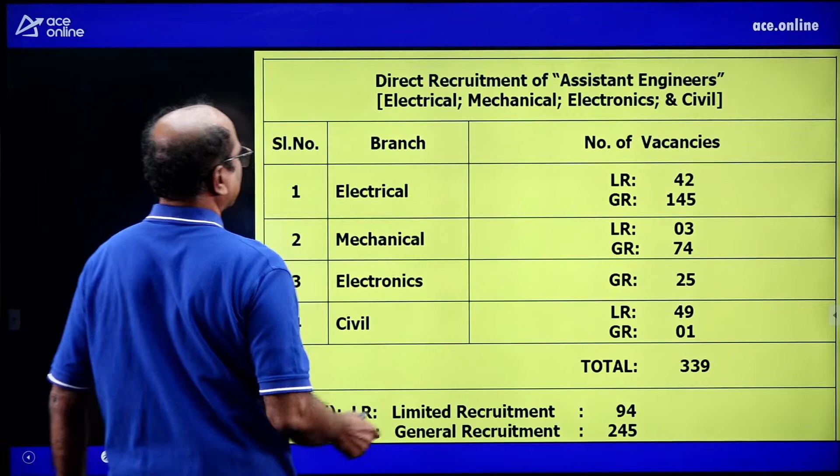Now these are the vacancies for civil engineers - 49 plus 1, 50 vacancies here. Mechanical engineers, 77 vacancies - direct and limited recruitment. And 50 vacancies in civil engineering.

A good amount of vacancies, enough to crack this examination. When we appeared those days, around 87-88, even for one post we appeared with success. So keep in mind, not the number of vacancies - you are there, there is a vacancy, that is the way you have to think and work for that. You are working for one vacancy, selection is important. Be positive towards selection and hard work.

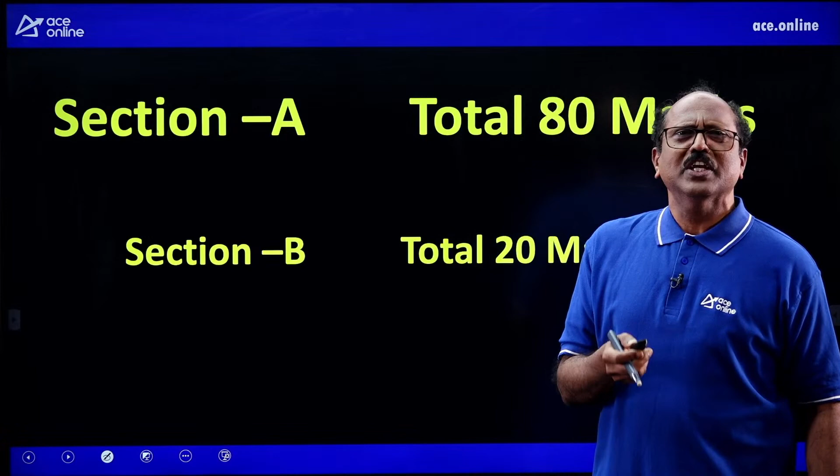Total marks 100. Part A technical, Part B non-technical. In technical, 80 questions, each question carries 1 mark. Section B, 20 marks - numerical ability, some English knowledge testing, and Telangana movement related questions, which we know very well. You can go through the 20 marks section.

At the moment we are focusing on the civil and mechanical engineering assistant engineer post in GENCO department, Telangana state government job - fluid mechanics and hydraulic machinery.

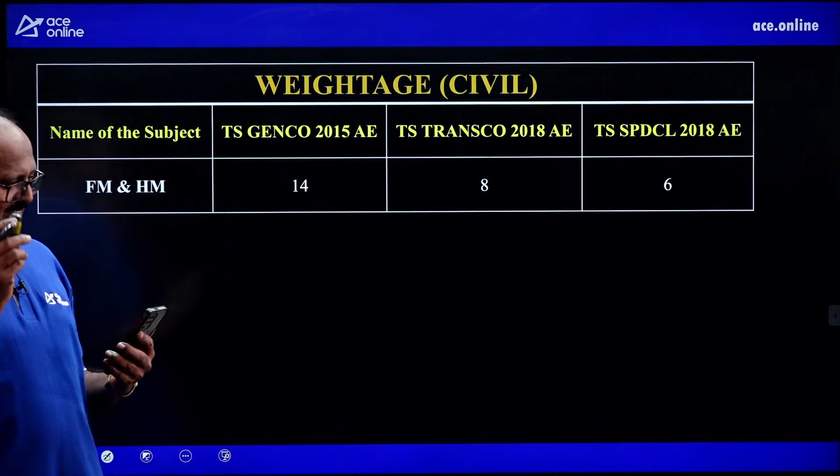Weightage of fluid mechanics and hydraulic machinery for civil engineering branch - if you see closely, there are 14 questions. For mechanical engineers, number of questions is 11. 14 questions for FM and HM, civil engineering given more weightage.

Similarly in 2018, if you observe Transco and SPDCL, there were fewer vacancies those days, but I am familiar with that - those times had 8 and 6 questions.

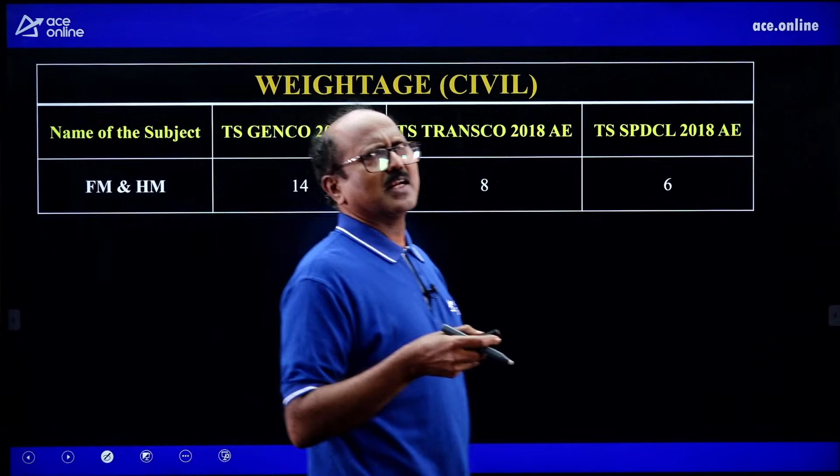Now for mechanical people, FM and HM weightage is 11 questions - 7 questions fluid mechanics, 2 questions water turbines, and 2 questions centrifugal pumps. 7 plus 2 plus 2, total 11 questions. So approximately 12% weightage given, more weightage compared to core subjects. Fluid mechanics and hydraulic machinery always get a reasonable, moderate weightage for any competitive exam.

Even if you consider GATE, IES, any state government exam, particularly Andhra Pradesh has 75 questions on FM, HM - 50% in paper 2, like that.

Now focus on fluid mechanics at a glance, and machinery. So before starting fluid mechanics and machinery, we need to give respect to the modern temples.

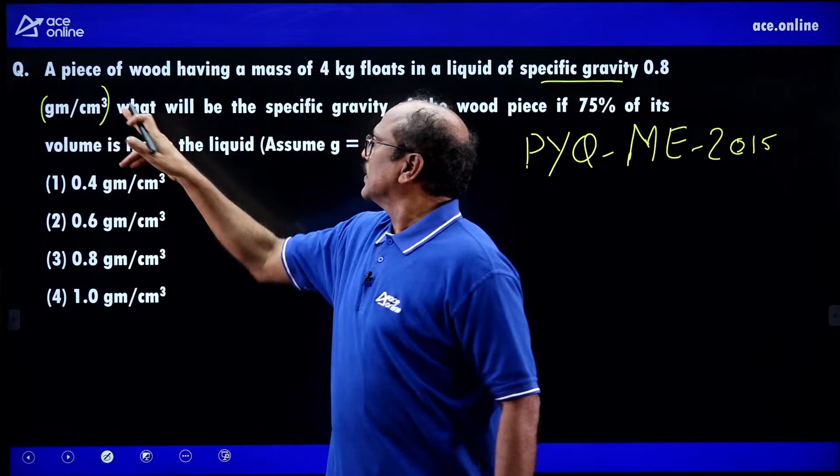A piece of wood having mass 4 kg floats in liquid of specific gravity 0.8. Specific gravity is given as 0.8, and units also given, but need not give units here. That is slightly an error. Specific gravity has no units. Luckily, the numerical value of specific gravity has no units, but the same value applies to specific mass, nothing but mass density in CGS units, gram per centimeter cube. If you take 0.8 without units, specific gravity is correct. If you take 0.8 with gram per centimeter cube, that is called specific mass, nothing but mass density. Anyhow, what will be the specific gravity of the wood if 75% of the volume is inside the liquid?

This question pertains to buoyancy, given in our booklets, ACE material, 3rd unit. Specific gravity of liquid is 0.8. Wetted volume - if you follow my class notes, you should write like this - means wetted volume is equal to 0.75 of total volume, V is total volume.

Then what is the specific gravity of the wood, that is the solid piece? By principle of buoyancy - we know this, no need to derive again - specific gravity of the liquid into wetted volume is equal to specific gravity of the wood body into whole volume. Specific gravity of the liquid, that may not be water, may be oil, because it's less than 1, 0.8, into wetted volume in the liquid, is equal to unknown value of specific gravity of the solid piece, wood, into total volume.

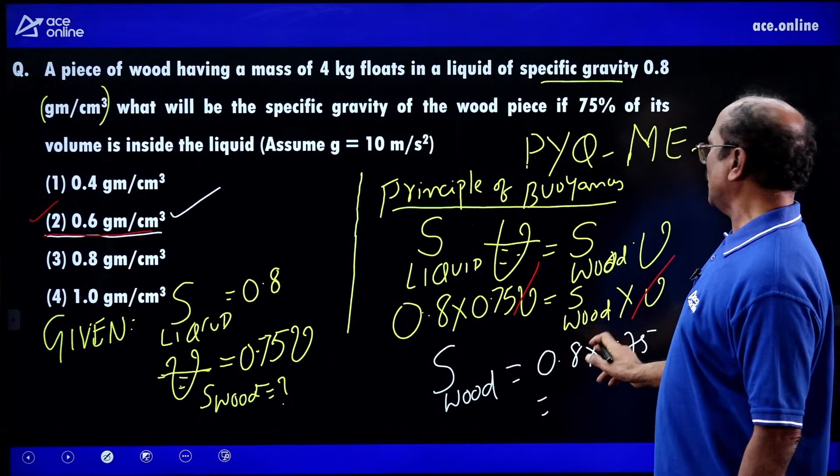If you see closely, without calculator, total volume cancels. Therefore, S wood, specific gravity of the wood, is equal to 0.8 into 0.75. For calculation purposes, 0.8 into 0.8 gives 0.64, but 0.75 is little bit less than that, so that sense apply in the examination. Answer is option B. Product of 0.8 into 0.75 is 0.6 something, so confirmed answer is option 2.

Buoyancy, 3 questions appeared in this paper; question sets are made supposing 1 question per chapter. Anyhow, 0.6 something is the specific gravity. Units given as gram per centimeter cube, that is specific mass density in CGS units. Without units or with units, same numerical value is important - truly speaking specific gravity 0.8, specific mass 0.8 gram per centimeter cube, same sense, 0.6 gram per centimeter cube. Units are balanced on both sides, volume cancelled, whatever units you write it is fine.

Next, second question, also from buoyancy. A rectangular plate, surface width 2 meters, deep 4 meters, lies vertically in water. What will be the pressure and center of pressure when upper edge is 2 meters below the free surface? Excellent question, worth question for both mechanical and civil. Such questions you can expect - even this question is at par with GATE and ESE exams.

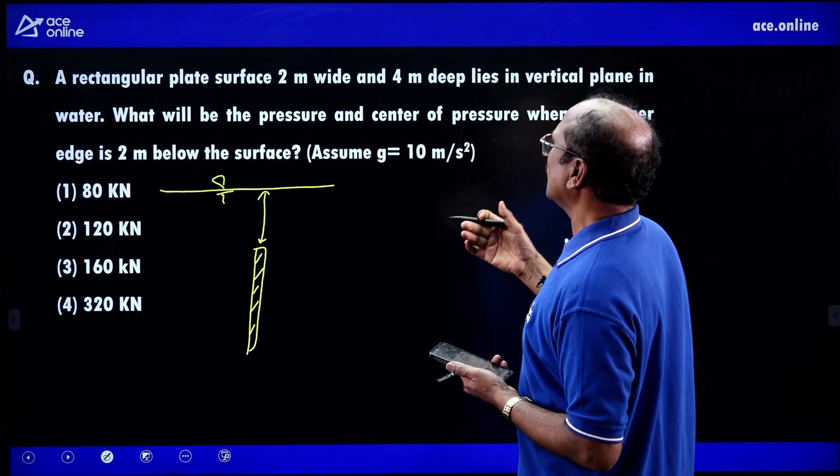A neat systematic question has appeared here. It is a free surface of water - the inverted triangle means free surface of water. A rectangle plate, this is the rectangle plate, immersed in water, top edge is 2 meters below free surface, so Y equals 2 meters. Then dimensions of the rectangle plate - if you see side view, this is the side view of the plate, plane plate - 2 meters width, height is 4 meters.

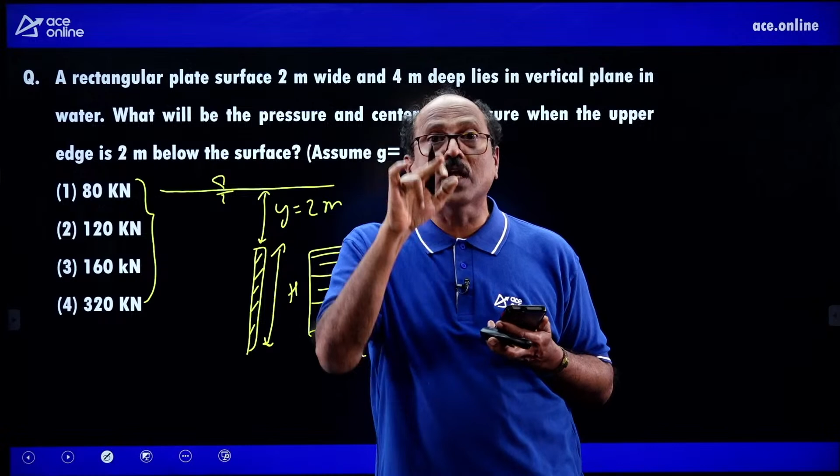Then it is expecting what will be the total pressure and center of pressure - only asking force, not center of pressure. Question supposed to be 2 bits: one is center of pressure in meters, other is total pressure. Total pressure is also called hydrostatic force - pressure units are different, total pressure units are different. Total pressure is called hydrostatic force, pressure force, with units Newton, kilonewton, giganewton, meganewton. Total pressure is force only, simple pressure is Newton per meter square. Never get confused with that.

Here supposed to be, by seeing the options, we have decided. So force on the rectangular plane surface of width 2 meters, height 4 meters is rho into G into H bar into area wetted. Is equal to rho into G into Y plus H by 2. This is the distance from free surface to centroid, G is centroid, below that C is center of pressure, where force is acting.

Force depends upon this H bar, which is the distance from free surface to Cg of the wetted surface. H star is the center of pressure - it is there but not asked. It is equal to 1000 kg per meter cube, G 10, this is 2 meters, depth is 4 meters by 2, area B into H, 2 into 4.

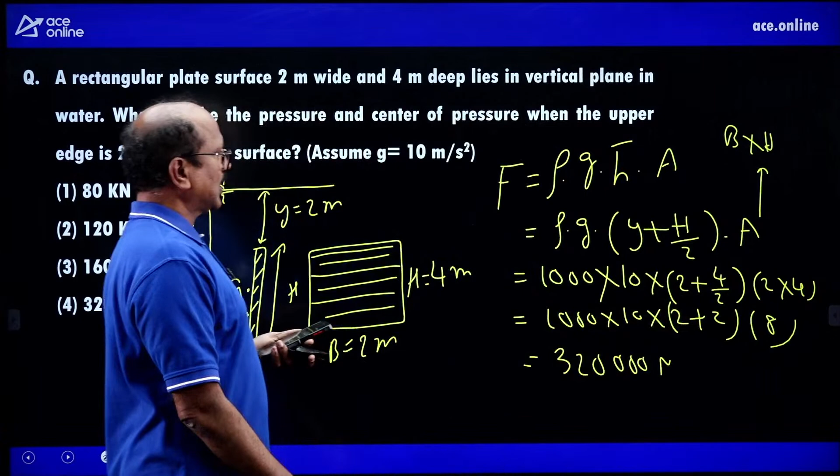1000 kg per meter cube, g 10 meter per second square into 2 plus 2 is 4, then 8. So 32, giving 320,000 Newton. Because 2 plus 2 is 4, 4 into 8 is 32. So the answer is 320 kilonewton total pressure.

Answer D. This type of question you can expect without a calculator. Focus on this type of question. In future, in place of rectangle it can be circular, it can be triangular. We have this in the class notes and in the ACE material also. Questions will surely be at par with our class notes and ACE material. You need practice, and how to practice we will discuss at the end of the course. No confusion necessary, no hurry-burry. Answer is D.

We are spending a little bit of time, but while practicing it is a matter of hardly 1.5 to 2 minutes maximum. This question is also from buoyancy, unit number 3.

What will be the volume of water displaced due to buoyancy of the wooden block? Width 2, depth 1 meter, density of wooden block given, and length is given. Width or breadth 2 meters, depth is 1 meter, length is 4 meters. Density of the wood, or specific gravity of the wood, is 0.7, with no units.

Density of the wood is nothing but specific gravity of wood into 1000, which gives 700. Just to make the subject clear, I have written it directly here. What will be the volume of water displaced? Yes, depth is 1 meter given. He has given the depth also.

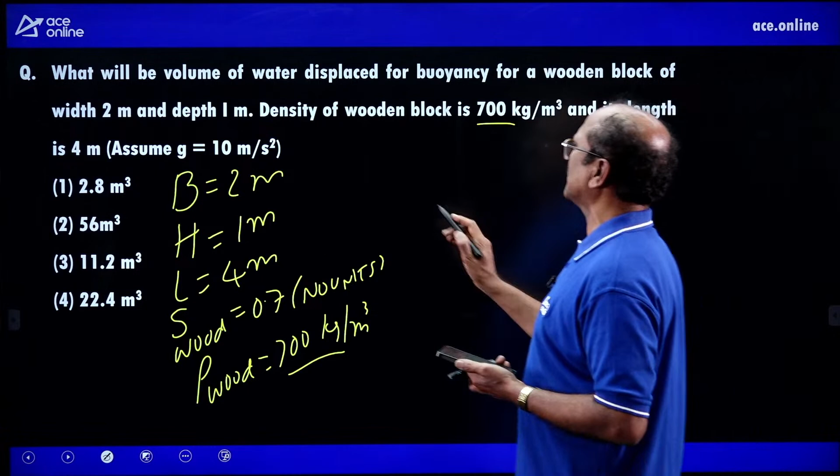So this depth given is small h, but total height is different. Volume of water displaced for buoyancy of the wooden block - the physical dimensions are like this: this is width B, this is the height, length is not visible, perpendicular to plane of paper. Immerse it in water - what is the wetted volume, the water displaced? This is unknown, small h, while capital H is given. So we know the subject knowledge very clearly.

A simple relation: S water into wetted volume (how much is immersed in water) is equal to S wood into total volume. S water is 1, since water is the material given, into unknown wetted volume, because we don't know small h. If you knew small h, it would be B into small h into capital L, where L is length of the body. This equals S wood, 0.7, into total volume which is L into B into H. This other volume is L into B into small h. Very clear - no need to find H.

You can find H also, the depth of immersion. Total height of the body given is 1 meter, depth is unknown. Anyhow, depth means 0.7 meter. Volume is L into B into H: L is 4 meters, B is 2 meters, H is 1 meter, giving 0.7 into 8 meter cube. So 1 into wetted volume equals 0.7 into 8 meter cube.

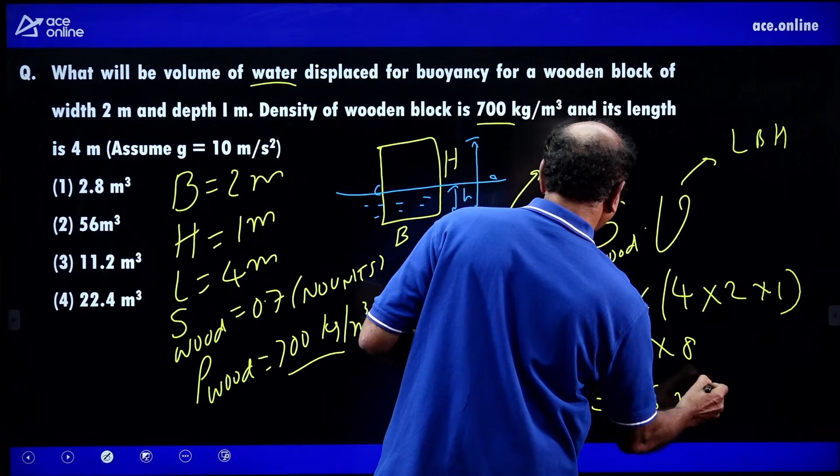0.7 into total volume: 4 into 2 is 8, 8 into 0.7 gives 5.6 meter cube. Maybe there's a typing error here - assume that, then the rest is correct, not 56 but 5.6, typing error. 7 into 8 is 56, with the decimal point, so the answer is 5.6. Everything in order. See, three questions observed from buoyancy alone.

Diameter of the pipe at two sections, section 1 and section 2, is 2 centimeters and 4 centimeters respectively. The velocity through the pipe at section 1 is 5 meters per second. What is the velocity at section 2?

So there are different diameters - this is the pipeline, 2 centimeters diameter, like this. This is the pipe, not branched. This is D1, this is D2, this is section 1, this is section 2, at section 1 we have V1, at section 2 V2. We know very well that for pipes in series, the discharge is same through the entire pipe, so A1 V1 equals A2 V2.

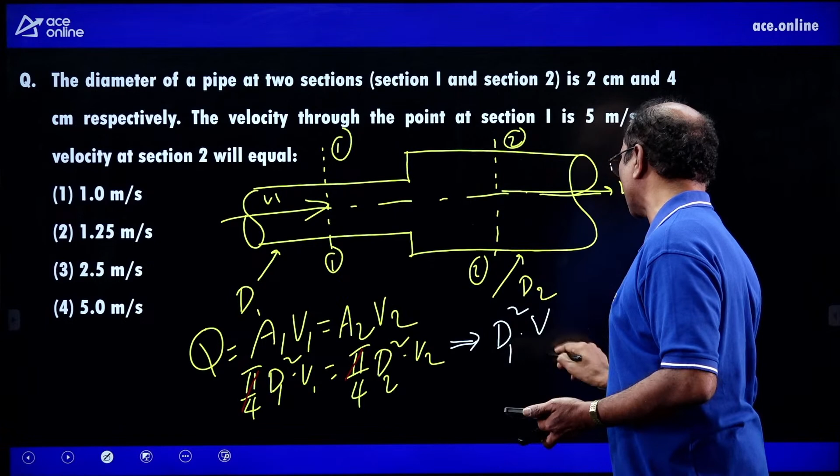Pi by 4 cancels out: Pi by 4 D1 square V1 equals Pi by 4 D2 square V2. After simplification, D1 square (in centimeter square) into V1 equals D2 square into V2. Keep the units consistent, centimeters properly or meters properly. 2 centimeter whole square into 5 meter per second - this is meter per second, this is centimeter square. See that the other end also has the same units: 4 centimeter whole square, which is centimeter square, into unknown velocity in meters per second.

4 by 16 is 1 by 4, which is 0.25, and 0.25 into 5 gives 1.25. This is simplification, not just calculation. V2 equals 2 by 4 square, that is 1 by 2 square, 1 by 4, 0.25, 0.25 into 5, 1 by 4 into 5, gives 1.25.

So 1.25, answer 2. So simple. What is the concept? This concept is continuity equation.

One basic question, because the examination is set for people from age 21 to 44 years, covering young people and seniors, though not senior citizens exactly, more like young seniors. So the paper setting will be like this only. Don't expect too much velocity triangles or something beyond your scope. The paper will be within the hands of the student community. Continuity equation, Bernoulli's equation, simple concepts.

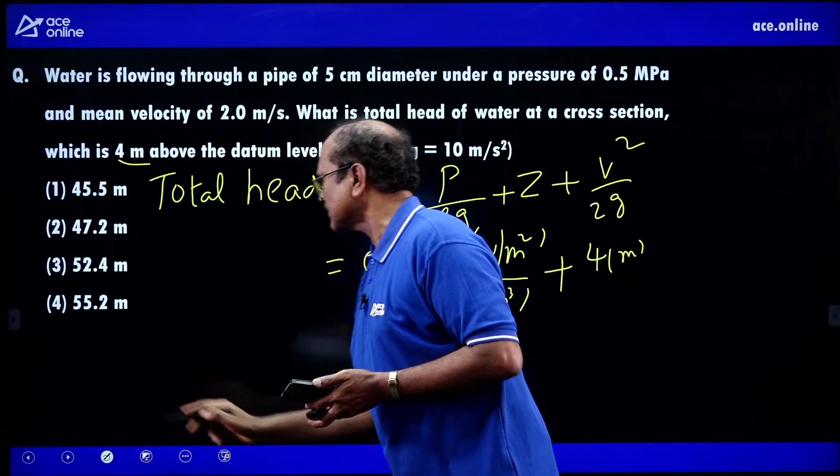After cancellation of these units, Newton cancels. Units are the backbone of fluid mechanics. If you are familiar with the units, 50% of the subject is in our hands only. This cancels, 1 by meter, 1 by meters. Keep in mind the units homogeneity. For civil engineers, we have dimension analysis also.

V is given as 2 meter per second, divided by 2 into G which is 10. This is meter per second whole square, this is meter per second square, final unit is meters. So the 5 centimeters diameter is extra data, no need to use it. So after cancellation of this...

0.5 into 4 zeros, so 2 zeros cancel, giving 100. 0.5 into 100, say 50, 50 meters. Plus 4 meters, plus 2 square by 2, that is 4 by 2 equals 2, 2 by 10 equals 0.2. Say 54.2 meters. So is the near value 55 or 54.2 there?

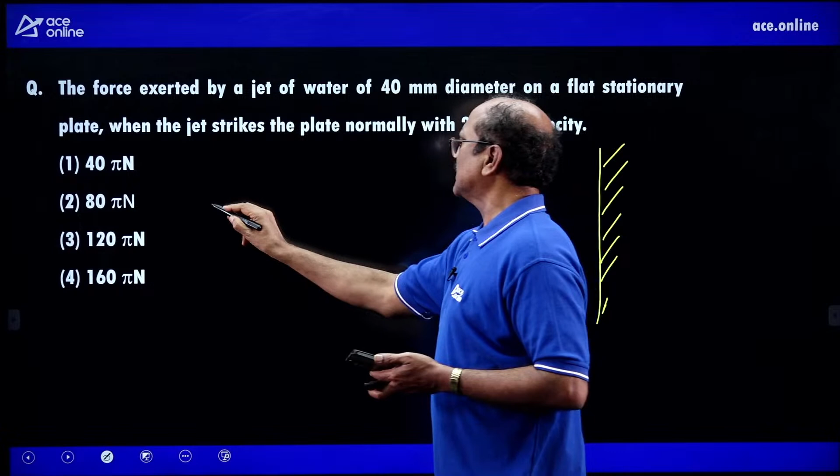Nozzle produces a high velocity jet, hitting the plate. This jet velocity V is equal to 20 meters per second. Diameter of the jet is 0.04 meters, that is 40 by 1000, 4 by 100, 0.04 meters.

What is the force experienced? What is the normal reaction? What is the force experienced by the water on the plate? Fixed plate subjected to a water jet, we know very well, mass into acceleration, that is equal to mass into change in velocity, rate of change of velocity. That m dot is written because mass by time into dv. M dot is rho Q.

V2 minus V1, in the x direction, because we want the x component. By simplifying this, rho into A into V. Final velocity in y direction is considered, x direction final velocity is 0, minus V, minus. The minus indicates the reaction offered by the plate, plus positive indicates the jet creating force on the plate. Negative positive, the difference is only this.

Jet on the plate is positive. Plate on the jet is negative. Action reaction, Newton's third law. Our need is magnitude, our need is magnitude. Rho A V square. Negative sign means force offered by the plate on the water, positive means force offered by the water on the plate. Force exerted by a jet of water on the plate, positive, no problem.

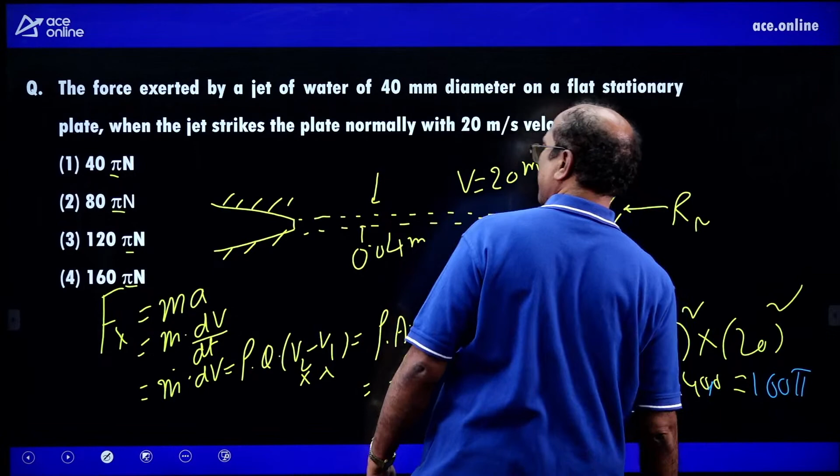By simplification, with close observation, this 4 cancels. Here 3 zeros, here 3 zeros cancel, here 1 zero cancels. So leftover is pi into 4 into 4. 4 into 40, 160, right? 160 pi, correct. Simplification also correct. 160 pi Newton, D answer. D answer correct, without calculator, just mouth calculations.

Very good, people are so responsive, people are so quick responding. People seem to be practiced already. Good, good, good, keep it up, keep it up. Super.

This is the question pertaining to compressible flow, excellent simple derivation, basic continuity equation for the compressible flow. I am solving all the questions available in our hands.

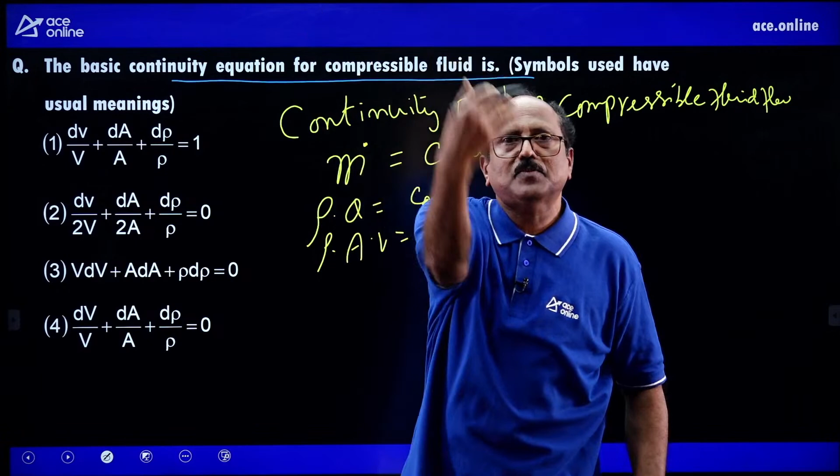Continuity equation of compressible fluid flow: M dot, mass flow rate in kg per second, is equal to constant. M dot is equal to rho into Q, is equal to constant. Rho into A into V is equal to constant. In compressible flow, rho also is variable. In incompressible flow, rho is constant. A into V is equal to constant by rho, again one more constant. 3 are variables here: flow through nozzle, flow through duct, flow through convergent, flow through divergent, subjected to density change, is called compressible flow. 3 variables.

Differentiate both sides. Differentiation of the constant is 0. Differentiate d(rho into A into V). We know differentiation: rho into dA into V plus rho into A into dV is equal to 0. Divide both sides by rho into A into V.

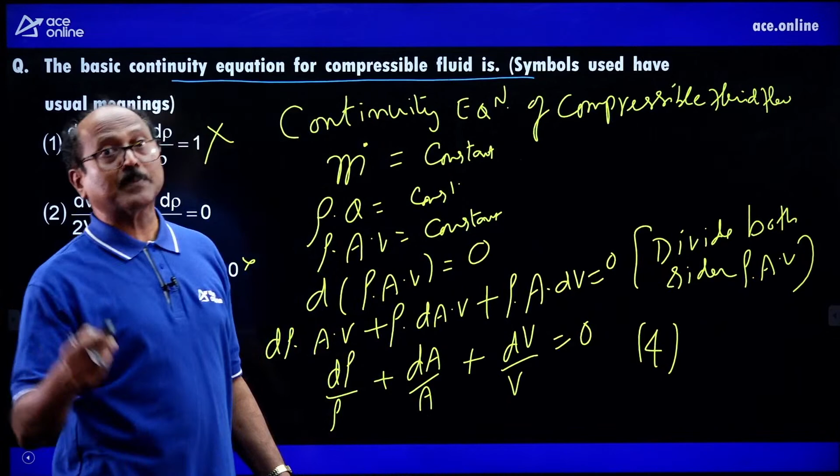We have compressible flow also here. Basic question, yes. Completed the previous questions on fluid mechanics, mechanical. Let us see some practice questions before attempting.

PYQs of the AE GENCO hydraulic machines. A turbine is a device which converts hydraulic energy into mechanical energy. Here suppose hydraulic machine can be a turbine, can be a pump. Option 1 is turbine, correct. Option 2 is reverse, mechanical into hydraulic.

This is for the water turbine, this is for water turbine, this is for water pump or liquid pump. Kinetic energy to mechanical energy also correct. It can be a windmill, it can be a windmill turbine. So turbine means, in our syllabus, water turbine. Argument point of this is also correct. Turbine can be wind turbine, but windmill we say. So appropriately, in this option, C also can be an answer. Strictly arguing, C also has equal weightage given.

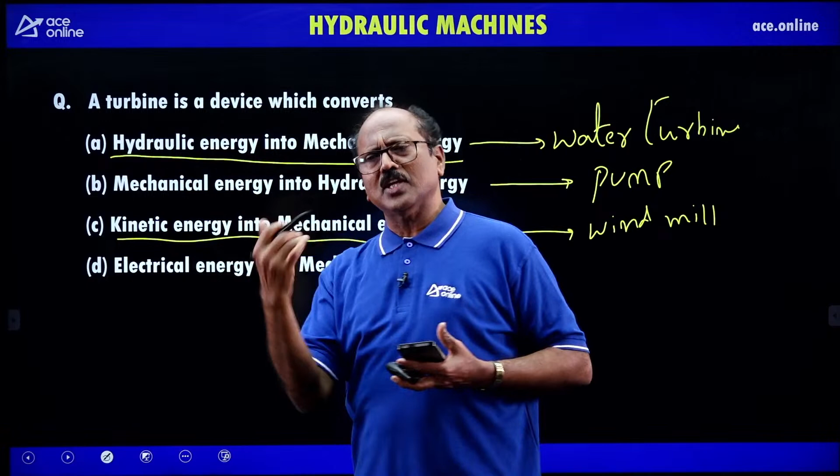Any energy - but hydraulic energy means anything, combination of pressure, combination of potential, combination of kinetic. Only why kinetic only? Why not potential energy? There it fails, so only for wind turbine it's correct. This is general, nothing is mentioned. Here, in place of turbine, if it is wind turbine, then C is correct. So turbine means total energy, combination of pressure, kinetic and potential. So correctly A, no doubt about it. C is wrong at present.

Then electrical energy into mechanical energy, so it can be a motor, it can be an electric motor. Converting electrical energy into mechanical energy - electrical motor, ceiling fan, table fan, exhaust fan, our water pump fan - water pump motor, not fan, water pump motor, electric motor simply. So like that, all available options, try to explore. So with n variables, you can create n factorial variables, n factorial questions also. There are 4 options, each option indicates some reasonable answers. Our question is turbine, converting hydraulic energy into mechanical energy, correct, A correct, not C. C is a limited answer.

For a head up to 25 meters, up to 30 meters - this question is given in other branches, electrical branch given. The syllabus is common to many branches, so it comes under power plant engineering for electrical people. Less than 30 meters is low head. Head less than 30 meters.

Low head turbine, Kaplan propeller turbine. This is high head, above 250 meters. This is medium head, above 30 meters and less than 250 meters.

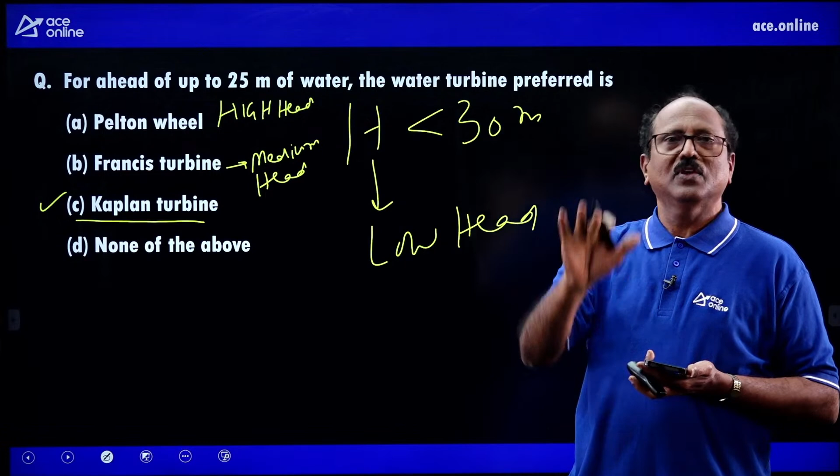Argument sir, high head above 250, above 300, above 280, anything valid, depend upon the data given, you take appropriately. So 200 meters given can be Francis. Nothing is there, Francis can be Pelton also. But Kaplan and propeller turbines less than 30 meters, less than 20 meters, less than 40 meters also. If you take Singur Dam, there you can have Kaplan turbine as per head, but Francis turbine used. So there are 22 numbers, 22 figures, 25 can be, 30 also, varies depend upon choice given, you choose correct answer. At present, reasonable answer is C, can be propeller turbine.

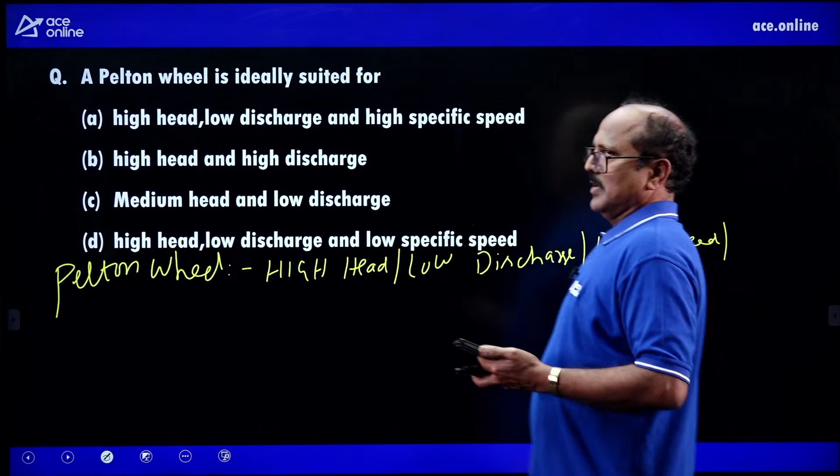Just information only, those who are prepared well, they know it very well. Low specific speed, tangential flow, and impulse type.

Like that, Francis turbine: medium head, medium discharge, medium specific speed, radial inward flow, and reaction type.

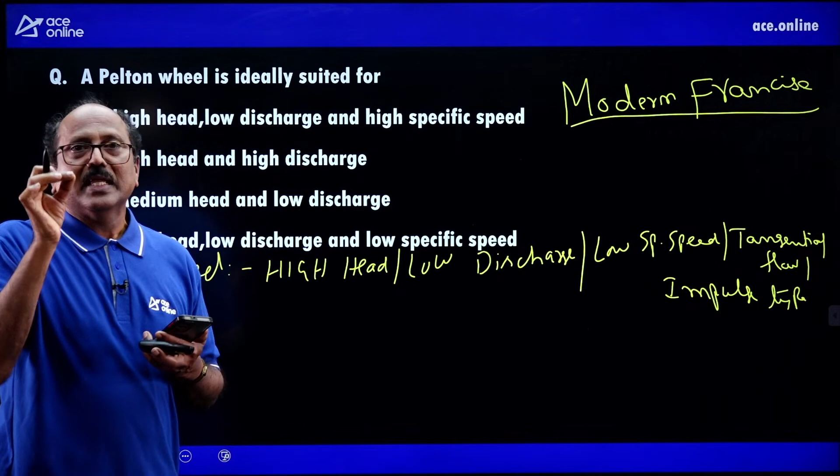There is one more word nowadays, a chance possibility. Keep in mind, a new terminology not much familiar to people: the modern Francis turbine. Keep in mind, important, it is similar to the traditional Francis turbine. Only difference is that its flow is mixed flow.

Mixed flow: radial plus axial. Enter radial, leaving axially - mixed flow is the modern Francis turbine. Remaining characteristics are same: medium head, medium discharge, reaction type, medium specific speed. But flow is not radial, mixing radial and axial.

That is important. Similarly, Kaplan turbines, propeller turbines: low head, high discharge, high specific speed, axial flow. Axial flow means flow parallel to shaft axis. If you take this turbine, mostly Pelton wheel is mounted horizontally, other turbines mounted vertically.

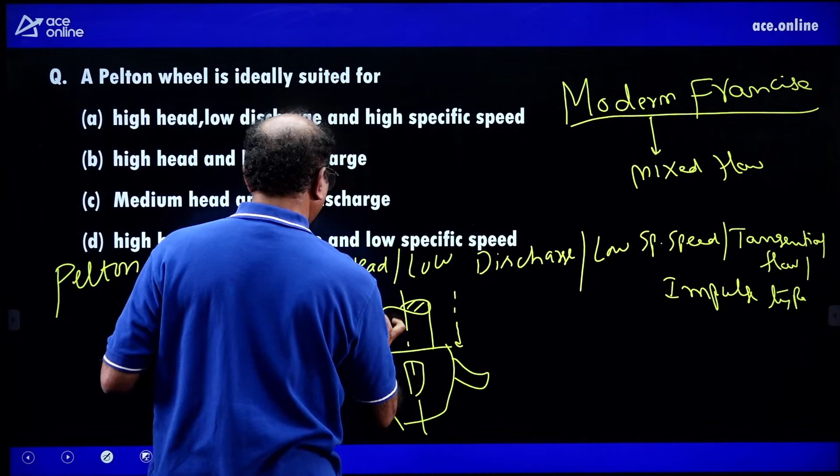These are the blades, these are the vanes. The flow is entering parallel to shaft axis. These are called axial flow turbines.

Now if you take our domestic affair, exhaust fan or table fan, air taken from the back side, thrown into the front side - this is axial flow. Flow of the fluid parallel to the axis of the shaft is called axial flow.

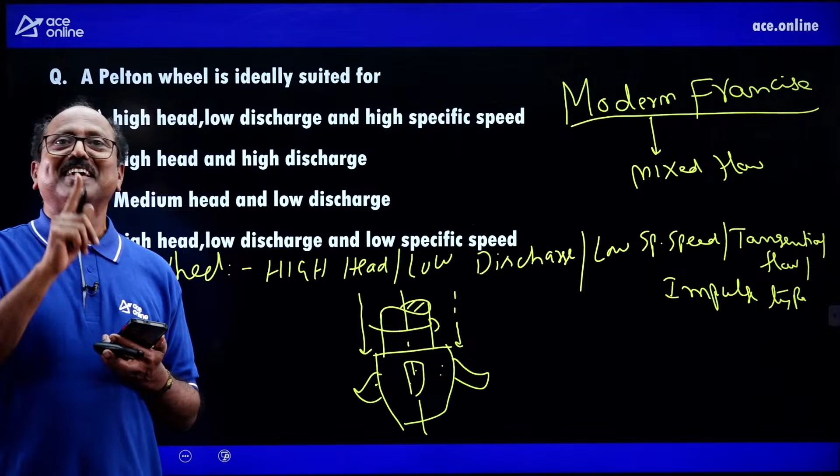Kaplan type. Then what is the difference between Kaplan and propeller? Important bit, this also a possibility this time. Kaplan turbine has adjustable blades, adjustable vanes... Kaplan turbine consists of adjustable blades, whereas propeller turbine consists of fixed blades, not adjustable.

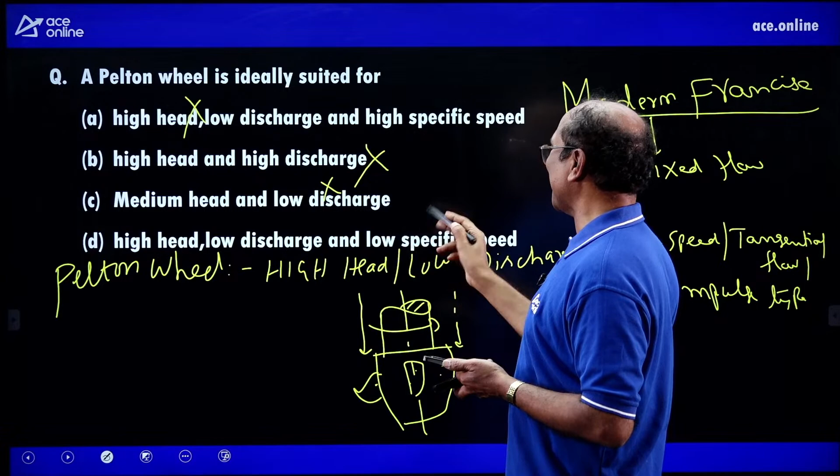So high head to high discharge never possible. High head to low discharge, okay, but wrong na, this not matching. Medium head to low discharge not matching. High head to low discharge, low specific speed, matching, see right? So very clearly given, high head, low discharge, yes matching, D matching. High head, low discharge, low specific speed, perfectly matching. Answer 4, answer D, a good question.

Apart from the question, some information given: difference between Kaplan turbine and propeller turbine. Kaplan turbine fixed blades - wrong, adjustable blades. Propeller turbine - fixed blades. That one. And modern Francis turbine - mixed inward flow, radial plus axial. Francis turbine is inward radial, Francis turbine is nothing but medium head.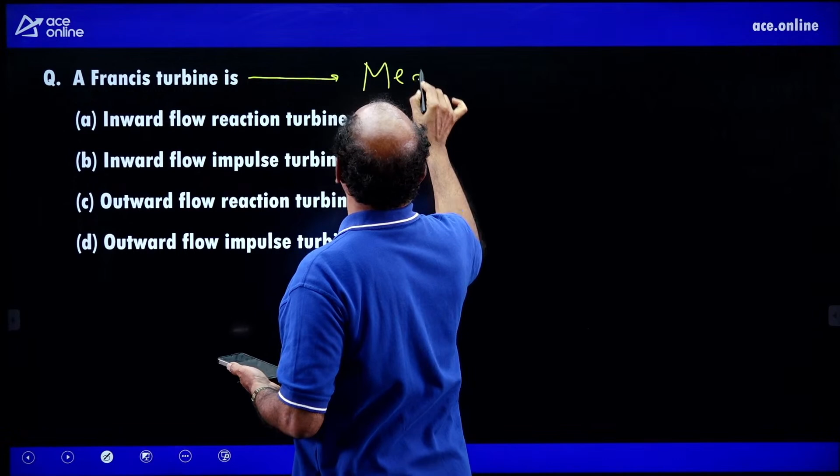Medium flow rate, medium specific speed, reaction type. We know reaction - reaction type means input energy is mostly pressure energy, partly kinetic energy.

Impulse means 100% kinetic energy, no pressure energy. That is Pelton wheel, working in open atmosphere, no draft tube is required. Other turbines - Francis, Kaplan, propeller, modern Francis turbine - need draft tube. What is draft tube? Converting available kinetic energy into useful head.

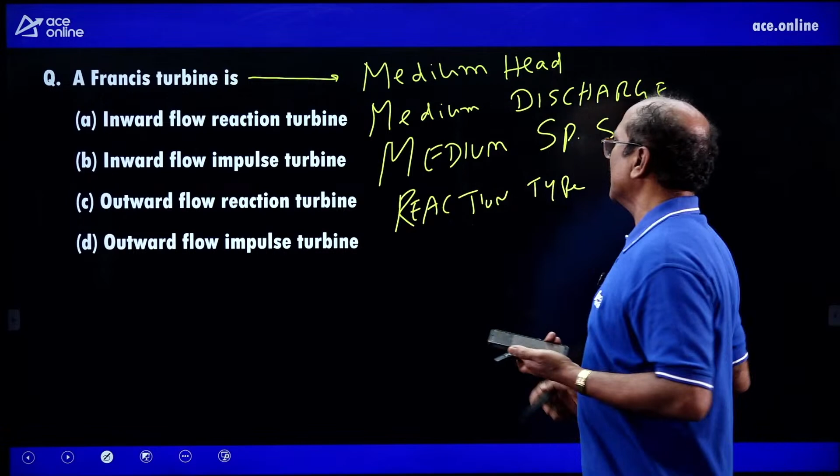Then last one is inward radial flow turbine. Inward radial flow, inward reaction - correct. No impulse.

Outward is there - outward turbine is there in reaction turbine type. Fourneyron, F-O-U-R-N-E-Y-R-O-N, there is one, but never used in that. Fourneyron turbine is called outward reaction turbine. You can check it later. There is a turbine under the name of outward reaction turbine - Fourneyron turbine, okay. So this is correct, A correct, this is not matching at all. B and D, C possible in future. Fourneyron turbine, F-O-U-R-N-E-Y-R-O-N, rarely used, not in commercial use.

Francis correct - inward radial reaction. Outward radial reaction - there is one turbine, namesake, I am giving a hint also: Fourneyron. Propeller water turbine - low head.

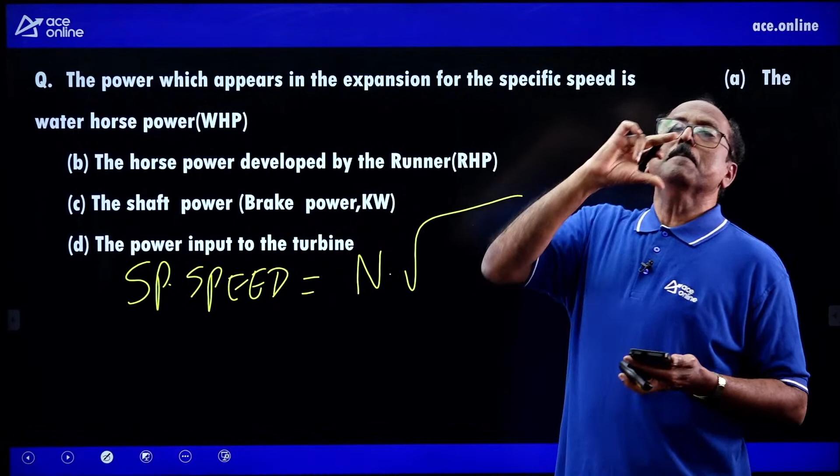Specific speed of turbine is equal to speed of the runner wheel. Runner is the turbine, impeller is the rotating element in the pump. Keep in mind, runner is correct: N, power in kilowatt divided by net head to the power of 5/4.

Mechanical people, important: N in RPM, P in kilowatt, nothing but brake power, shaft power, after losing all. So if you say IC engines - indicated power, friction power - all losses subtracted. The final power is called brake power, which is useful power, which is shaft power. So shaft power, brake power correct, not the horsepower. Right, A. Okay, C answer correct.

Pelton wheel degree of reaction - this question appeared in power plant engineering, electrical department, Triple E of the syllabus in the name of power plant: steam power plant, hydraulic power plant, and so many other subjects, subtopics - conventional energy, non-conventional energy, environmental pollution effluents, like that.

So degree of reaction we know: the change of pressure, the change of enthalpy in the moving runner, divided by total change of enthalpy, total change of pressure. Pressure in terms of water turbines, enthalpy in terms of steam turbine. In degree of reaction, impulse is 0.

Impulse 0, Pelton wheel is impulse. Degree of reaction: change of working fluid - pressure or enthalpy - divided by change of enthalpy or pressure in the stator, rotor, non-rotating element, plus pressure or enthalpy drop in the rotary element. So degree of reaction, in terms of water turbine or steam turbine - ours is water turbine - pressure drop in runner wheel divided by pressure drop in guide wheel, that is called stator, guide wheel, nothing but stator, not rotating, just like a ring, like rotating but not rotating, non-rotating element - guide wheel, delta pressure in runner.

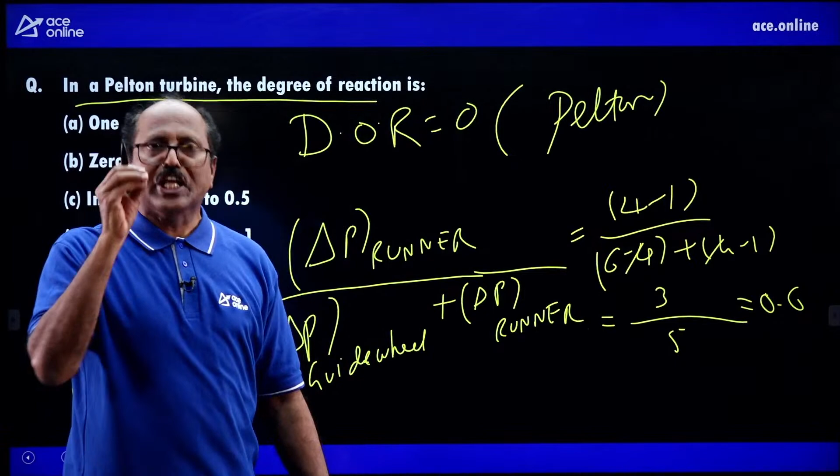0.6 degree of reaction means 60% able to convert pressure energy into useful energy, 0.4, 40% energy wasted in the form of guiding water. This is one example with reference to turbine. This type of thing, I don't know if it's much discussed or not, but useful for those who are not familiar, those who are preparing self, those who are preparing with our material, with our recorded videos - it is there. Maybe different values I might have used.

Degree of reaction important for the water turbines also: Francis turbine, Kaplan turbine, propeller turbine will have degree of reaction less than 1, more than 0. So 0 correct. In case of steam turbines, Parsons turbine - Parsons 50%, Parsons turbine 0.5. So these are valid for the Francis turbine and Kaplan - this is Francis, this is Kaplan or propeller. So C and D valid for Francis, Kaplan, and this is correct. Answer B correct - this is Pelton wheel.

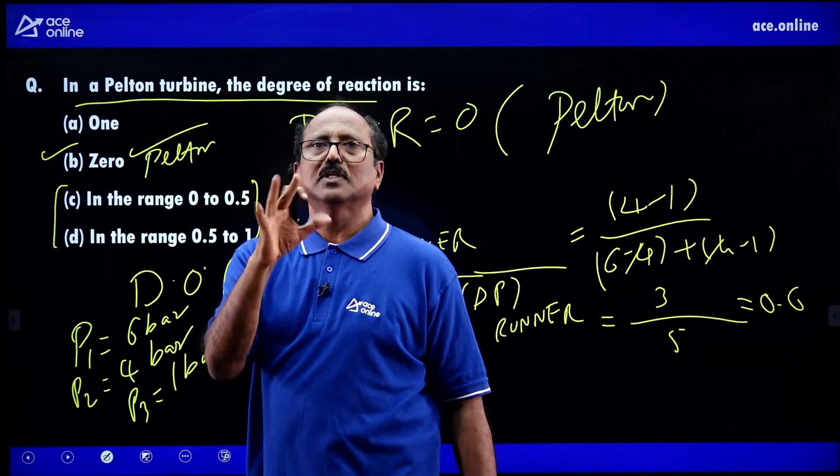Pelton wheel, no pressure change - working in open atmosphere, so no pressure change across the Pelton wheel. No draft tube is required. Pelton wheel operates in open atmosphere like a ceiling fan type, doesn't require any pressure drop, any conversion of kinetic energy into pressure energy like a draft tube. No draft tube is used. Degree of reaction is 0 only for Pelton wheel.

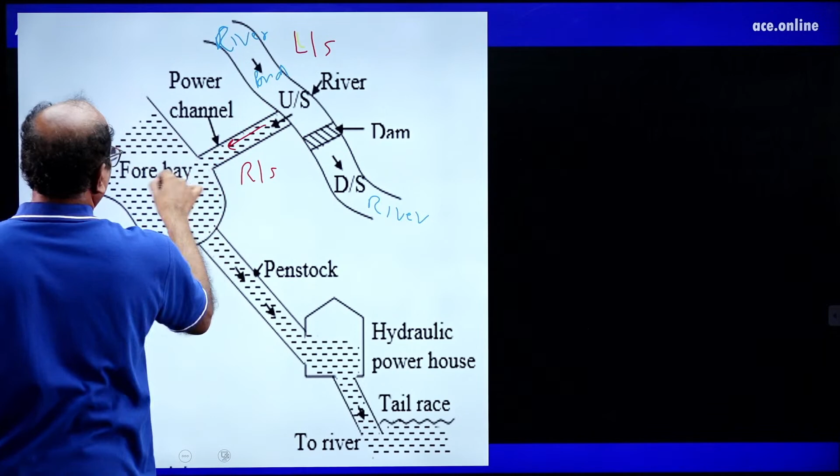Water is drawn from the main river and stocked here - this is a small pondage. Water is taken from here to the penstock, to the power plant. This is the power plant. It goes to the draft tube, then to the tail race, and again mixes into the mainstream. This type of treatment is very useful for electrical people. For them it is not that serious, but for us it is useful.

The explanation is given, you can read this later, you can read it in slow mode. Explanation for the forebay is important.

Next, which hydroelectric power plant works without pondage? Without pondage means no reservoir required - runoff. Runoff means whenever flood comes, water rises in the river. In summer, no water, sand is exposed. During rains, water rises. You keep a turbine at a certain height, no separate structure required, just mounting on the concrete wall, open for the water coming. Flood water comes and makes the turbine rotate because of the water flow. It's called runoff water - in runoff water no reservoir is required, only during flood time power generation happens, only during floods it works. That is runoff river water. Pondage means pump storage, you know that.

Same peak period, pump and turbine both in combination. During peak period, turbine produces power. After peak period, early morning 2 or 3 o'clock, no power is required, then the same power is used from the national grid and the same turbine works as a pump to reverse it. Where there is shortage of water, pumped storage house is used - where the hydraulic machine sometimes works as turbine, sometimes as pump. Downward is power generation, upward is pumping action. Anyhow that is a special characteristic, just study it, keep in mind the possibility of a question on the importance of the pumped storage plant.

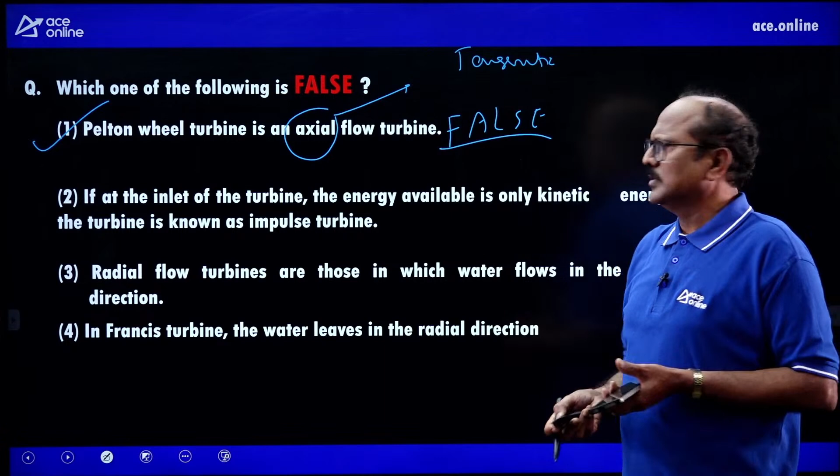Francis turbine flows radially - radial flow turbine in the radial direction. At the inlet of the turbine, energy available is only kinetic energy - that is called impulse. At the inlet, only kinetic energy, the turbine is known as impulse turbine. This is also correct, all are correct: 2 is true, 3 is true, 4 is true, false is A. Right, input energy 100% kinetic energy is called impulse, like the Pelton turbine. Right, next question - 2 questions on turbine, 2 questions on pumps.

Hydraulic machinery, mechanical - which of the following is a correct statement? Degree of reaction - oh, repeated, C. Degree of reaction equal to 0 for impulse turbine. Equal to 0, equal to 0. Other turbines have degree of reaction less than 1. Answer is 3.

Rotating element of the centrifugal pump is the impeller. This is correct. This is the water turbine.

Turbine rotating element, suppose this is T. T stands for turbine.

Will have rotating element, impeller? Wrong. This is called rotor. For rotor, input is hydraulic energy, output is mechanical energy.

This is rotating at N RPM. How much speed is necessary? The speed necessary must be equal to synchronous speed, N equals 120F by P. F is supply frequency, 50 Hertz, electrical terminology. P is number of poles.

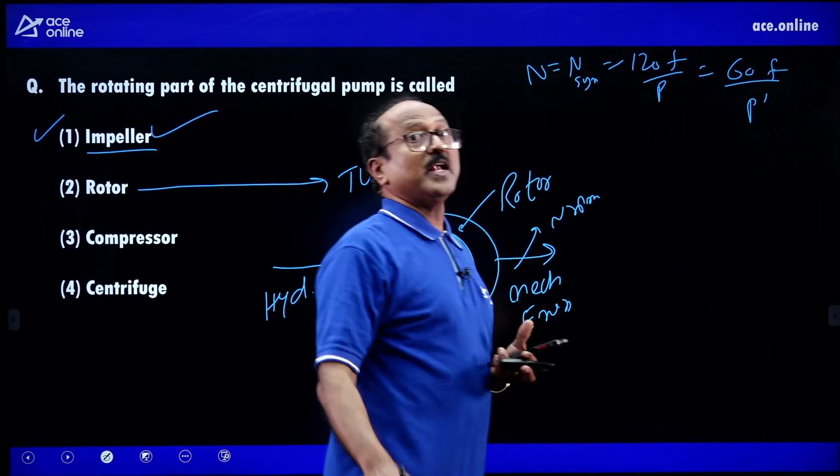It can also be 60F by P dash. Possibility of question this time. P dash is number of pairs of poles, P is number of poles. So 120 into 50 divided by number of poles, or 60 into 50, where 50 is the supply frequency.

This question is a favorite this time. Can be mechanical, civil, or any other branch. This is a very famous question, possibility.

Keep in mind, synchronous speed of the generator should be equal to speed of the turbine. To control the speed, you have to control the discharge. That is governing mechanism, keeping constant speed by changing the discharge. Keep in mind, synchronous speed of the electrical generator is nothing but speed of the turbine.

120F by P, or 60F by P dash. Number of poles, number of pairs. P is number of poles, never get confused with the symbols. P dash is number of pairs of poles.

I am trying my level best to match in the final exam maximum questions from this discussion. It's a part of preparation only, strategy. No one can give a guarantee, right?

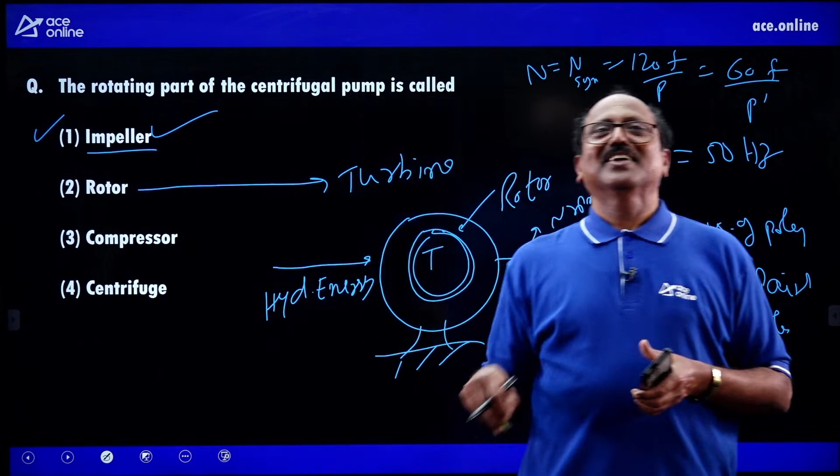So rotating element in the pump is impeller. So pump time, what is pump time? P stands for pump.

Given energy mechanical, rotation energy, and getting energy hydraulic energy. This is called impeller.

Rotating element, in our ACE booklet first chapter, this is the name of the nomenclature. ACE booklets, almost 100% I am sure, my subject is available, FMHM.

Next question, 2 questions from the pump. For incompressible flow, pumping power by expression. A good question, a new question. This is a pump. Excellent question this. Beyond normal student preparation question.

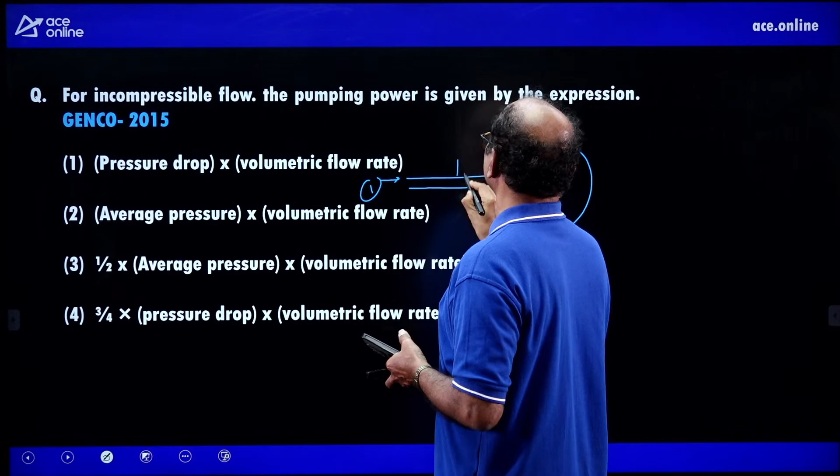Pump given this. This is suction 1. Here keep the pressure gauge. P suction, P vacuum.

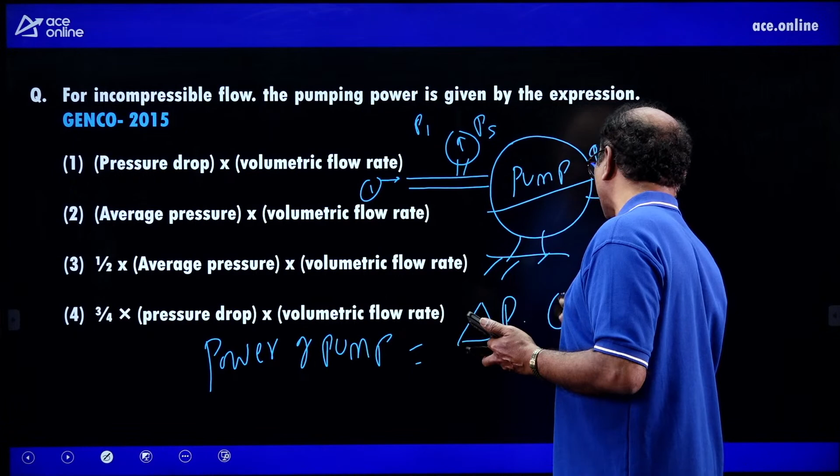Right, okay. Power of the pump is equal to change of pressure into discharge. Units: watt.

The pressure units are Newton per meter square. Discharge units, meter cube per second. After cancellation, Newton meter per second. Meter square, meter cube, meter cancelled. Newton meter is called joule. Joule per second is called watt.

So pressure change: pump is meant for increasing pressure, I can say increase the total energy. Not only pressure, it also increases hydraulic head, and it also increases velocity, moving with velocity V, na? The outlet of the pump is the summation of the pressure energy, datum energy and kinetic energy.

Total energy increases, not only pressure energy, but if the pipe is horizontal. Outlet of the pump, outlet of the section, can be in a submerged tank or overhead tank. That time velocity is 0, then only pressure. Priority-wise, much priority to pressure increase.

Next priority, total pressure energy. Net priority, total energy: kinetic energy plus datum energy plus pressure energy. So pump is delivering outlet velocity, outlet pressure, outlet head increase. Total energy increased, say horizontal pipe, no head.

Pipe exit is in the tank where velocity of the flow reaches 0. Then pressure energy only. Anyhow, P1 negative pressure, P2 positive pressure. Difference can be summation: P2 minus P1, or P2 plus P1, so like that. P1 is suction, na? Net is P2 plus P1 divided by rho g, is called it.

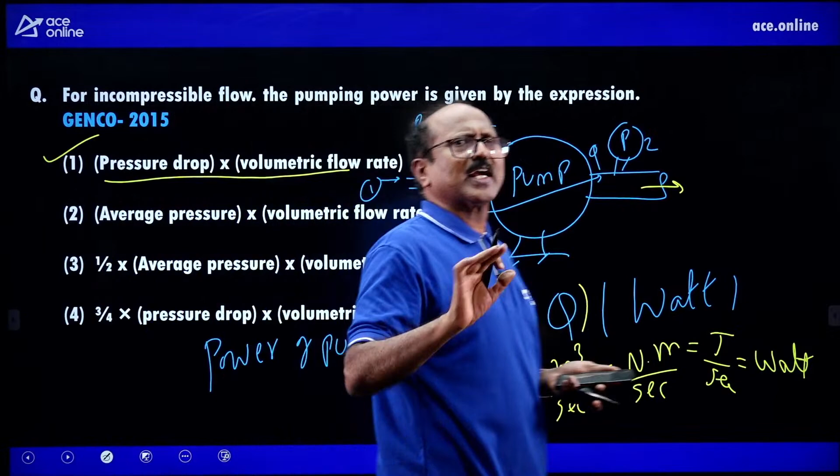So answer A. This is a new bit, nowhere cut and pasted. This is a new bit. This bit you can observe in APPSC hydraulic system. This question is observed in APPSC multiple choice question, not exactly similarly.

P1, P2 given, Q is given. What is the pressure loss? Something else. Anyhow, A is correct, not average, not 1/2, not 3/4.

Right, so last question on pump. 2 questions on pump covered, na. One is rotating element of the pump: impeller. Second is power formula for the pump: change in pressure into discharge.

Then one question on degree of reaction, one question is impeller like this, then rotating element, then Pelton wheel false statement.

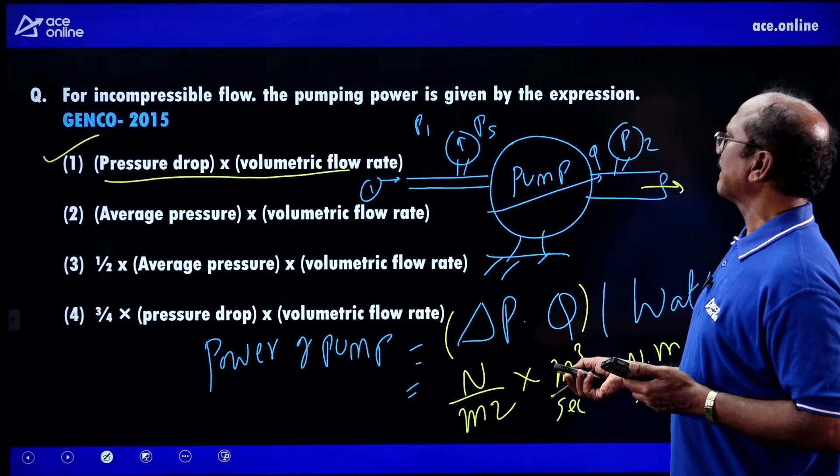Yes, completed mechanical. Now focus on the civil people. Now civil, yes, keep in mind time factor.

These questions appear in civil. Let mechanical people also follow. Civil, mechanical, no difference, questions can exchange. Knowledge is same: civil, mechanical, fluid mechanics is same in all the courses.

Now questions focus on the civil. Fluid mechanics, see how easy the questions are.

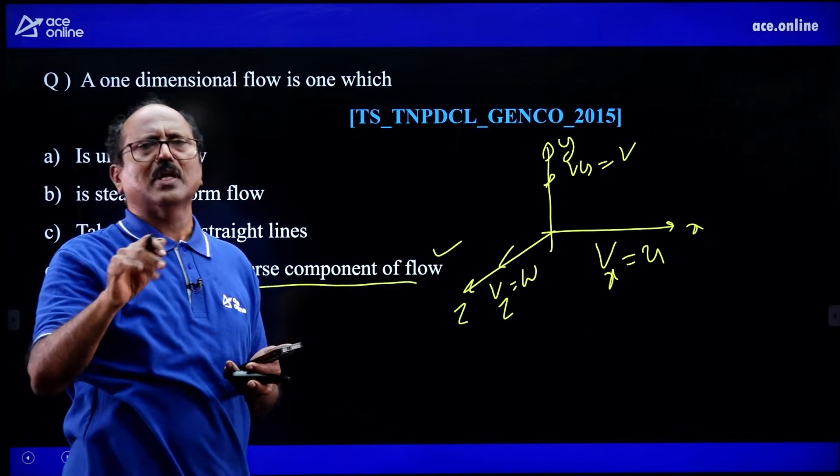One dimensional flow is one in which taking changes in one direction, ignoring other directions. Involving directions means x direction, y direction, z direction. Only consider x direction velocity Vx, nothing but u, ignoring Vy and Vz, we say V and W. Ignoring V and W, taking only x is called one dimension. Sometimes ignoring U and Vz, taking only y direction is one dimension. Taking one direction changes in mind on paperwork, ignoring other dimensional velocities, that's the answer.

Euler's number, not Euler's equation. Euler's number is equal to inertia force by pressure force. Correct. Viscous force by inertia is Reynolds number. This is Froude number, Fr. This is Reynolds number. This is EU, Euler's number.

This is not like that, it's there in heat transfer, it is there in other courses but not fluid mechanics. Weber number, Euler's number, Reynolds number, and Froude number - these are important numbers. Mach number, Reynolds number, Froude number, Mach number, Weber's number, and Euler's number. These 5 numbers are enough to get through the examination questions.

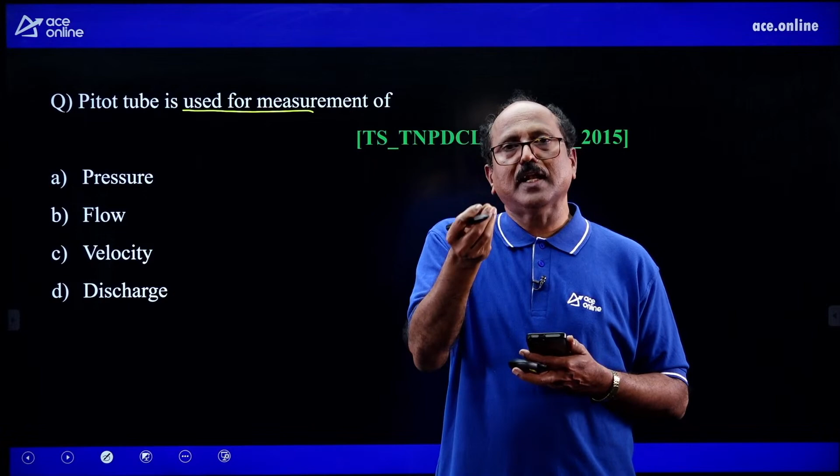Next, pitot tube used to measure - it measures static pressure, dynamic pressure, stagnation pressure differently. It is used to measure velocity. It measures total pressure head, or stagnation head, or dynamic head, depending on the type of pitot tube. Simple pitot tube does not measure static head or dynamic head - it measures total head, also called stagnation head. Differential pitot tube, also called static pitot tube or Prandtl pitot tube, measures dynamic head, pressure head.

And use it to measure - Pitot tube is used to measure velocity of the flow in pipe as well as open channel flow.

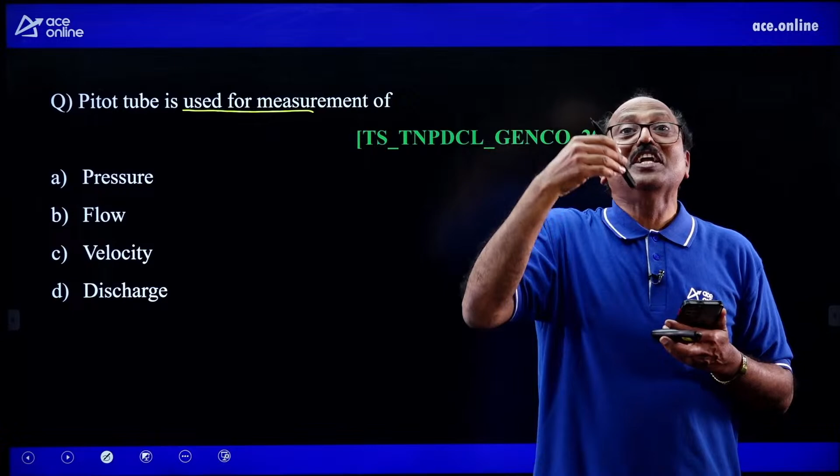Thermometer - it measures temperature, not in Kelvin, but in degree centigrade or Fahrenheit. It is not just used to check temperature generally; it helps to check our human body health. Simple example: thermometer measures temperature of the human body in terms of Fahrenheit or degree centigrade. Thermometer is used to check the human body condition, abnormal or normal, like that.

The word 'used' changes the entire answer in APPSC Telangana PSC. Used means velocity in pipe or in open channel flow. It measures - not 'use' - it measures directly stagnation head or total head or some other head. Okay, this is correct.

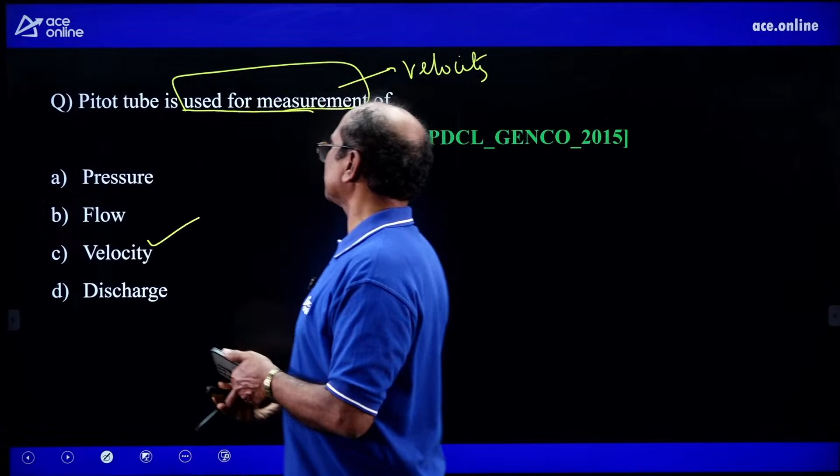So I discussed good information. Next question: to generate 1000 HP, 1 HP is equal to 0.736 kilowatt, head 81 and speed 500 - what type of turbine? We have trained people a number of times. Specific speed of turbine formula - for civil people given, a good question, worth it for mechanical people too.

Speed is 500, under root of 1000 - wrong, you have to multiply 0.736 divided by head 81, to the power of 5 by 4. No calculator is allowed. 500 under root of 736 divided by 81 means 9 square, 9 kada, 3 square to the power of 5 by 4, 4 cancelled. I am trying my level best to cover all the questions. Everyone is under stress nowadays, I want to avoid that stress.

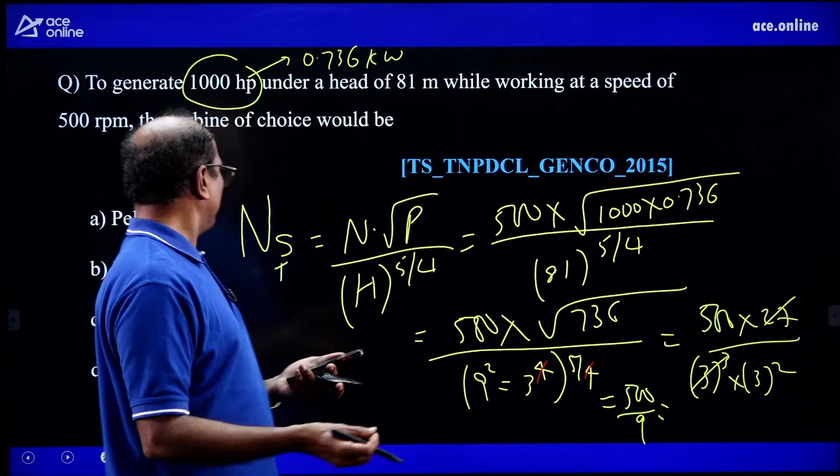Under root 736 can be approximately 27, just guesswork, 27 my guess, approximately, not accurately, 26 something odd. Divided by 3 to the power of 5 - 3 cube into 3 square, 3 cube is 27, cancelled. So 500 by 9, around 500 by 10, approximately 50, something like that. So definitely Pelton wheel - 500 by 9, so 500 by 10 example, okay, just more than 50. So it is Francis turbine more than 60 to 300, Kaplan turbine more than 300.

It is around, so 5 times again, 5 times 55, less than 60, low specific speed, Pelton wheel. Irrespective of the head, if you see head and choose Francis turbine, that is wrong. Choosing turbine, I have discussed this a number of times in classroom, in our material, in our recorded free lectures. Selection of turbine, scientifically based on the range of specific speed, not head, not discharge, not anything else. Choosing water turbine with a purely scientific approach is called specific speed.

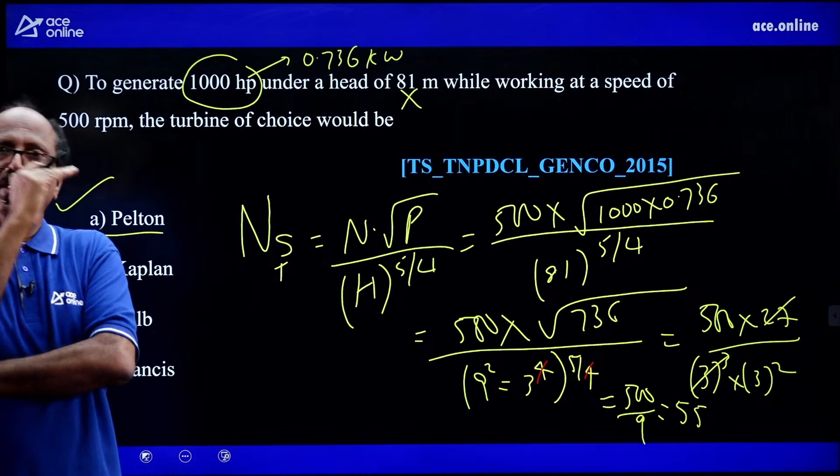Specific speed less than 60, choose Pelton. 60 to 300, Francis. Above 300, Kaplan propeller. For the estimated value 55, round figure near value, less than 60, choose Pelton. More than 60 up to 300, Francis. More than 300, Kaplan propeller. So Pelton is correct, but people may choose Francis by observing 81 meters as medium head.

That would be wrong, so there's more temptation to commit a wrong answer here. This type of question is a valid possibility. Paper setters are experts nowadays, they are exposed, so don't underestimate the people setting the papers.

Be careful, it's like a war.

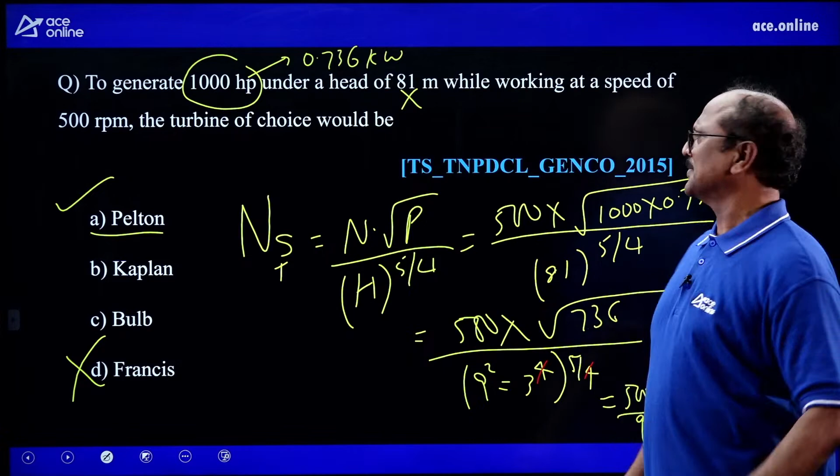Bernoulli's equation. Tank is open at the top with some depth of water. What is the velocity of water leaving the tank? The depth of water gives the head, and velocity equals root 2gh, which everyone is familiar with. Head is the water depth.

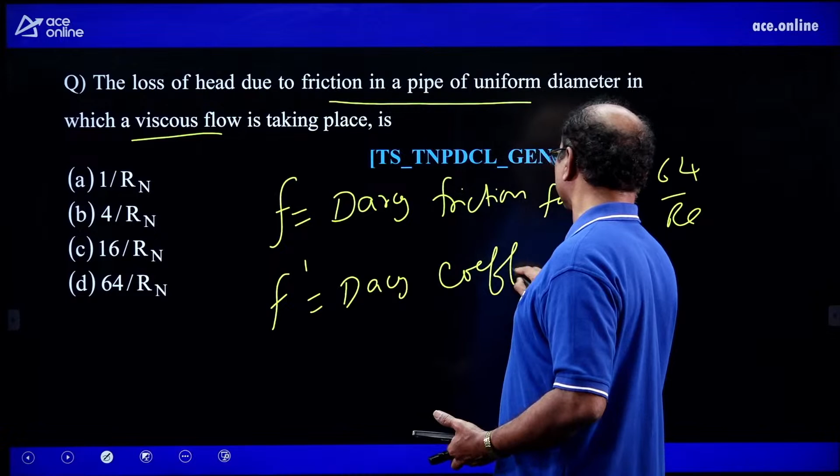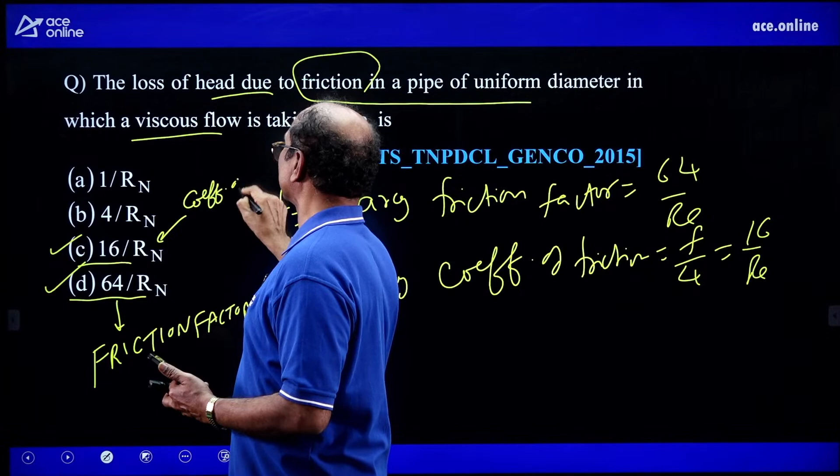16 by RE is also correct. So my personal choice is that both should be given credit because it's not mentioned which factor they want, and the paper setter hasn't indicated the target for us. Both are correct, this one is friction factor, and that one is coefficient of friction, they are different. Both will be given weightage, both are equally accepted as answers. There's no question of leaving this out. People preferred option D, but I also prefer C. Both will be given marks. It's not indicated that it's specifically due to friction in one form, so friction factor is correct and coefficient of friction is also correct. Both answers are available and both will be credited.

Next, maximum hydraulic efficiency for impulse turbine. We know hydraulic efficiency equals output by input. Output is rho Q into V1 minus U times 1 plus cos phi into U, divided by input of half m dot v square. By differentiation and simplification, U equals V1 by 2. Maximum power is at 50%, meaning jet velocity at 50% equals tangential velocity of the wheel.

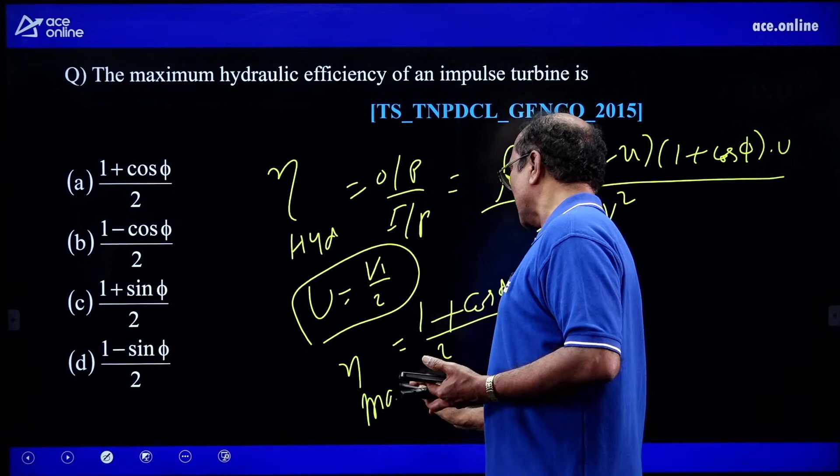If you simplify this, you get 1 plus cos phi by 2 for maximum efficiency. This is derived in the notebooks and classroom books, everything. Keep this derivation in mind. Friction factor is not given here, so K is taken as 1, giving 1 plus cos phi by 2. A hint is given for the maximum power condition.

The condition is velocity of the wheel is 50% of jet velocity supplied, then simplifying further gives 1 plus K cos phi, where K is called the friction factor, typically 0.9 or 0.95, as seen in civil engineering questions.

14 questions. With increase in size of the tube, what happens to depression? This is unit number 1, appearing now regarding the capillary tube, specifically capillarity rise.

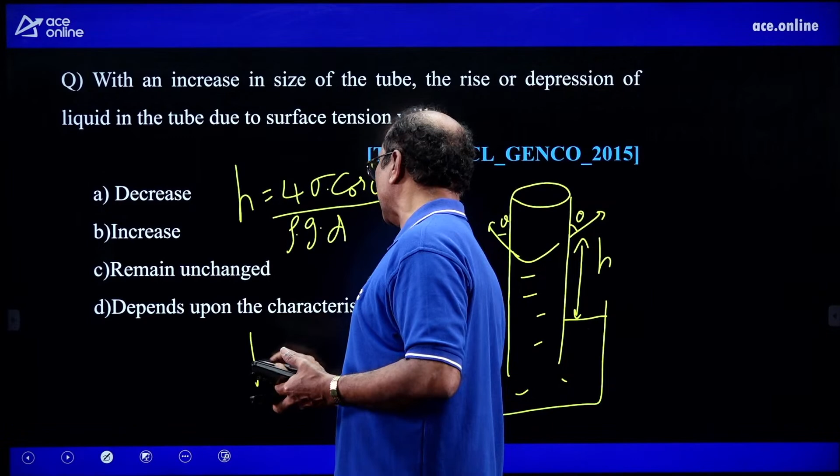We know H equals 4 sigma cos theta, where sigma is surface tension and theta is the contact angle, whole divided by rho g d, which is gamma d. Head is inversely proportional to d, keeping other parameters constant. Smaller diameter gives larger height. So with increase in size of the tube, capillary rise decreases. So simple.

Now properties of fluid have appeared as the first question, and poise as well, so 2 questions from properties of fluids. Good, for civil engineers, 2 questions appeared from properties of fluids. Increase in size of the tube causes a decrease in the liquid column of the capillary tube, decrease.

Overall efficiency of the steam power plant, okay, anything on that - this is not in fluid mechanics or hydraulic machinery, it is power plant engineering.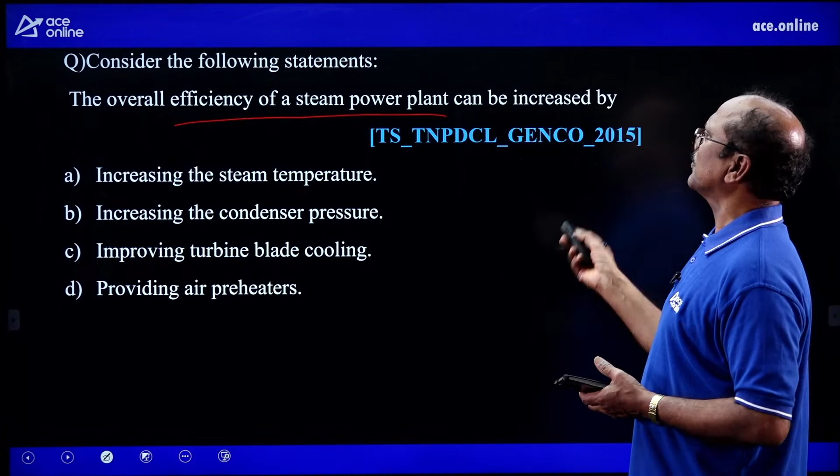Increase in steam temperature, okay, correct. This is a power plant engineering question, but there's an error here. For civil engineers, a pure mechanical question was given, cut and pasted somewhere. I know very well this question is cut and pasted from the ESE mechanical paper. For civil engineering GENCO, it's cut and pasted mechanical ESE bits. This question was given in GENCO fluid mechanics, hydraulic machinery for civil engineers, but it appeared in the form of a velocity triangle. So these are not given properly, I'll take the other way.

One is tangential velocity, these are U's - U2, U2, U2. One is absolute velocity, jet velocity, and W is relative velocity, we say VR. So this figure is missing something here, we'll rectify that. This is correct: V2 is absolute velocity, U is tangential velocity, W2 is relative velocity. So there is some error, I want to rectify it.

Radial impeller, it is called pump impeller. Is it a turbine? No, it is a pump. This is part of the impeller. This is bend forward, a bend forward vane. This is radially in, this is out, like this. This is U, this is absolute, right? This is the relative velocity. Velocity, this is relative velocity, called W.

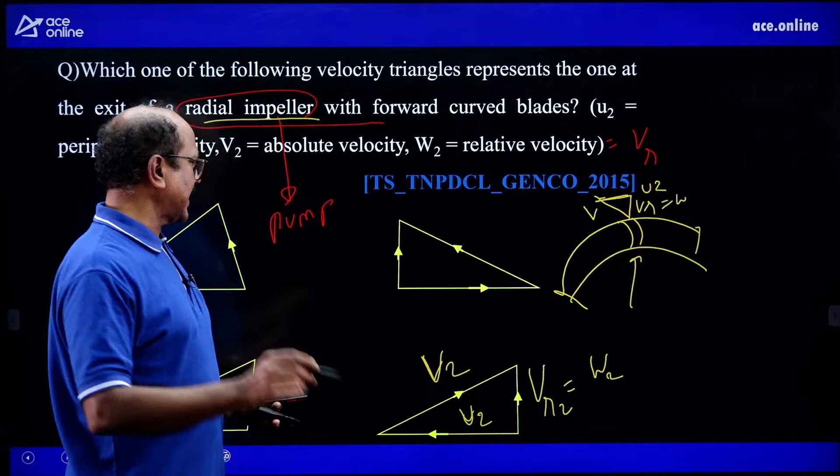I took this, observed the error, and rectified it. This one also has missing data, a lot of missing data. The missing data is steam tables - steam table data given as temperature, pressure, enthalpy. These are steam tables. A steam tables question from civil engineering, how is that possible? This is the pressure, this is the temperature, specific volume, specific enthalpy, entropy - a lot of information. So data is missed, entire data missed, yet the question is there.

This question is cut and pasted from the ESE mechanical for civil engineers. No table, no diagram, a lot of data missed. The diagram and tables, one page of printed matter, is missing from the question itself. 2015, FM, HM, civil engineers - this question is a pure mechanical steam turbines question. No table is given. How can we calculate this? So this question is deleted from the awarding marks.

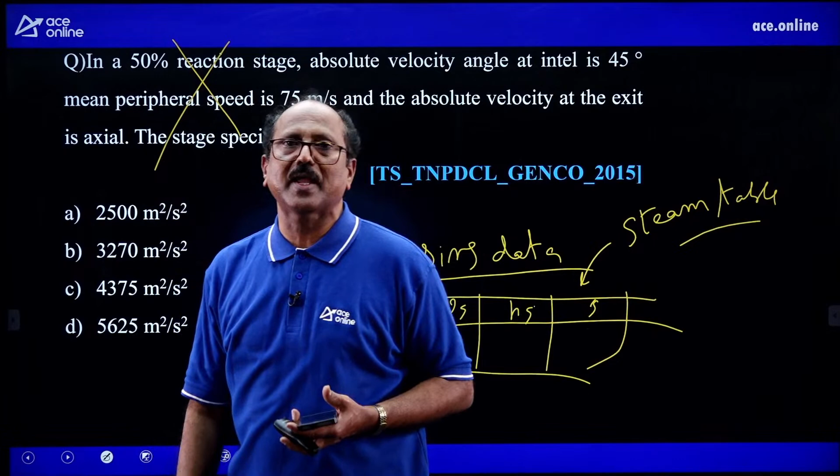50% reaction, Parsons steam turbine. I just want to discuss how such questions appear, sometimes with mistakes. Such questions will not be awarded marks for anyone. Don't waste your time in the exam. If you feel it's beyond your scope, leave it. Don't waste time in the examination hall. Keep in mind relevant preparation, definitely identify wrong or right, and use your preparation for the elimination method.

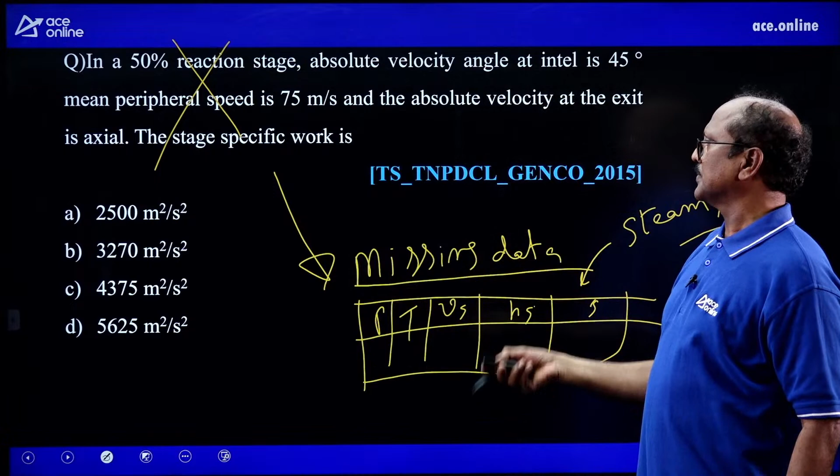Okay, anyhow, this question is related to pure mechanical steam turbines. Properties of steam necessary: change of enthalpy, m dot into enthalpy before the turbine minus enthalpy after turbine, m dot into H2 minus H3, something like that. This is beyond civil engineers. Mistake in the exam question itself. I just discussed it, leave this. Maybe the answer is D, we don't know. Don't worry, this is correct.

Which of the following do not have same dimensions? Kinetic energy and potential energy have same dimensions. Torque and energy have same dimensions. Impulse and momentum have same dimensions. Kinetic energy is in joules, potential energy is in joules. Torque is Newton meter, energy is also Newton meter, joules. Impulse is force into seconds.

Force is Newton, time is seconds. Newton means kg meter per second square, into second equals kg meter per second. So dimensionally matched, dimensionally matched, dimensionally matched. This is not matched because momentum - force into radius, force into lever arm equals Newton meter, angular momentum. I into theta, mass moment of inertia into theta. This is mk square.

Kg meter square into radian per second — not at all matching properly. Rate of angular displacement is different, momentum and force are different, so these two units are not matched. Radians involved here, but the way it is written, it is nothing but a type of angular momentum, rate of change of angular momentum, which is I into theta, where I is moment of inertia, mk square, mass into radius of gyration. So these are not having the same units.

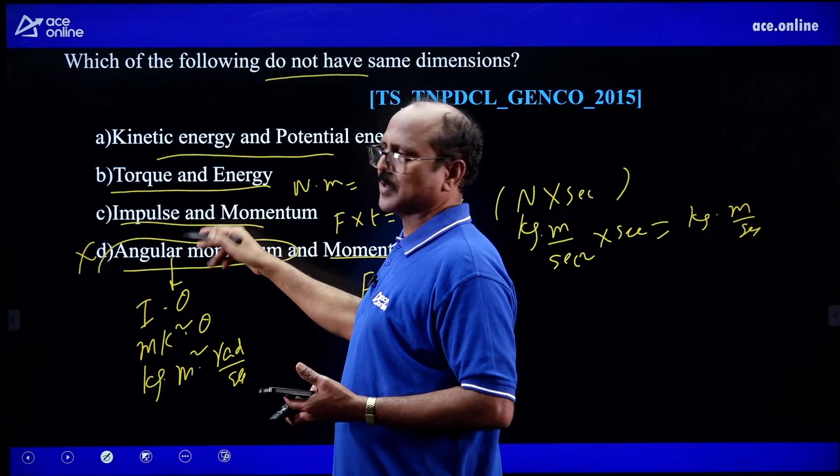Remaining are solved by elimination method. Kinetic energy, potential energy are the same. Work done, torque, or energy are the same, Newton meter. Impulse, force times second, converted to kg meter per second, moment, same unit. These three are having the same dimensions.

We are approaching target time. Target time was 8, still I extended.

Okay, Reynolds number — very old story, inertia force to viscous force. Save our time. Inertia force to gravity force gives Froude number.

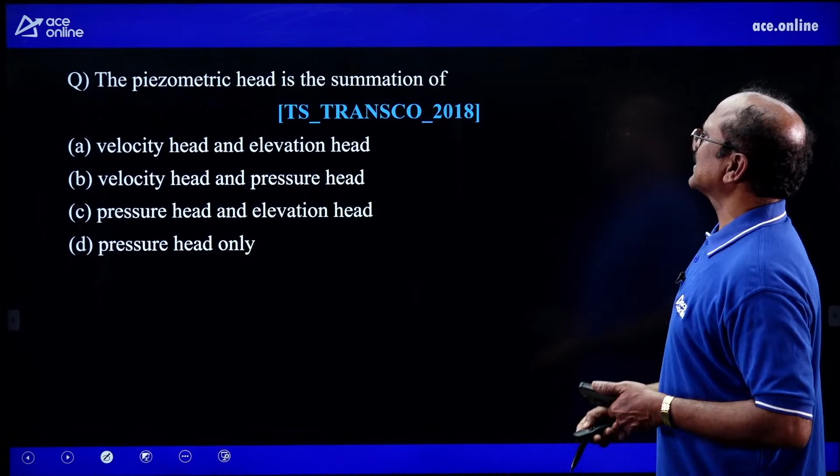Piezometer measures the summation of the pressure and datum — piezometric head, pressure head and datum head. P by gamma, which is rho into G, plus Z is called piezometric head. Known bits: continuity equation is based on the conservation of mass.

Notch is the angle, V type. This also confuses many people — they argue 130 is also called something else. So, Q, discharge through V notch or triangular notch, is 8 by 15 CD root 2G h to the power of 5 by 2 into tan theta by 2. Differentiate discharge for maximum, simplify this, and you will get 90 degrees.

Less than 90 or more than 90 is impossible. So maximum discharge through V notch, maximum flow rate through triangular notch occurs at theta equals 90. If you substitute tan 90 by 2, that is tan 45 equals 1, the entire value becomes maximum. Other than that, less than that, tan theta by 2 is less than tan 45. So 90 by 2 is 45 — at 90 degrees only this angle is maximum.

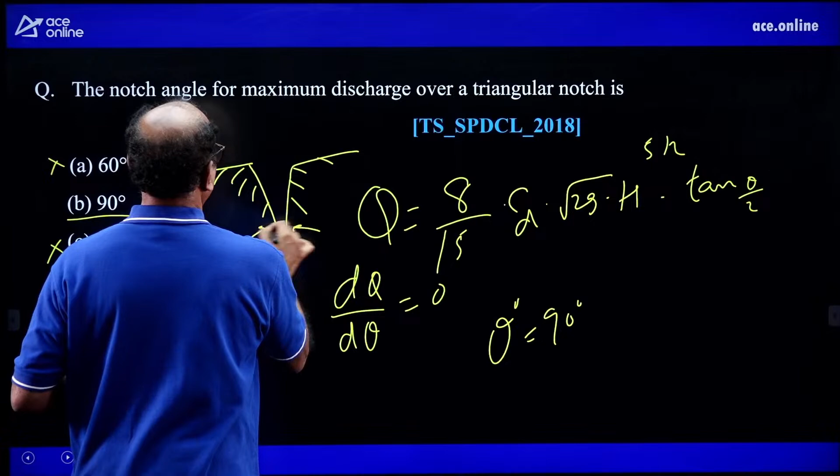Square root of inertia force to the gravity force, inertia force to gravity force is called Froude number. More questions are observed on dimensional analysis for civil engineers. Easy.

A stream is discharging 400 meter cube per second, falling 50 meters. What is the potential energy per time? Power is equal to rho into G into Q into H, that is gamma into Q into H. Water given as 10 kilonewton per meter cube, Q given as 400 meter cube per second, head given as 50 meters — all together, cubic meter units cancel. This equals 4 into 5, which is 20, with the zeros: 3 zeros already there, 1 zero, so 4 zeros total.

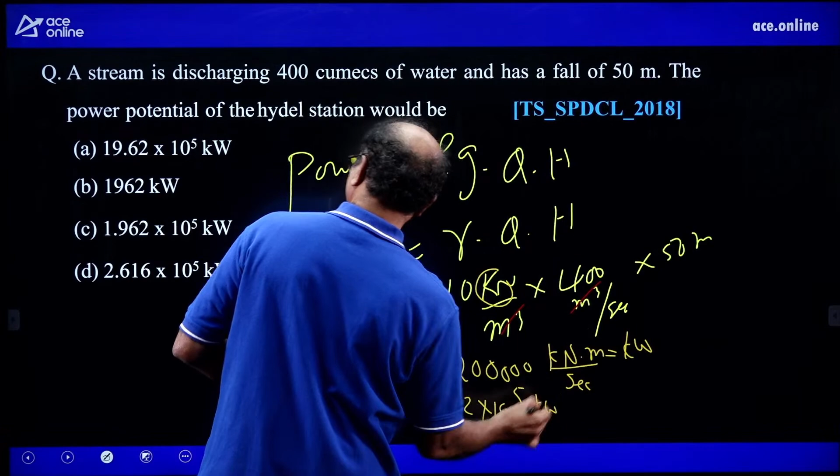Then one more zero, giving 20 with that extra zero. This is kilonewton meter per second, which is equal to kilowatt — 2 lakhs kilowatts. Because kilonewton is given, it converts to kilowatt, which equals 2 into 10 to the power of 5 kilowatts. But 2 is not exactly there — the near value is 1.96, because the G value is taken as 9.81.

Very clear: gamma is equal to 9.81 kilonewton per meter cube — weight density, other name specific weight, other name unit weight of water. So for calculation purposes, gamma equals rho into G: rho 1000 for water, G 9.81, units Newton per meter cube. 9.81 stays, 1000 is kilo. This can be taken as approximately 10, giving answer 2 into 10 to the power of 5. That can be written as 1.96 into 10 to the power of 5 kilowatt, so answer C is correct — others giving 20 are wrong. With G value 10 it's easy, 2 lakh kilowatts, but 2 is not exactly there — with G value 9.81, it's less than 2, giving 1.96. Answer C. Do it slowly, in a slow mode.

I want to do more questions because this is the final chance before the competitive exam, GENCO. Okay, next one.

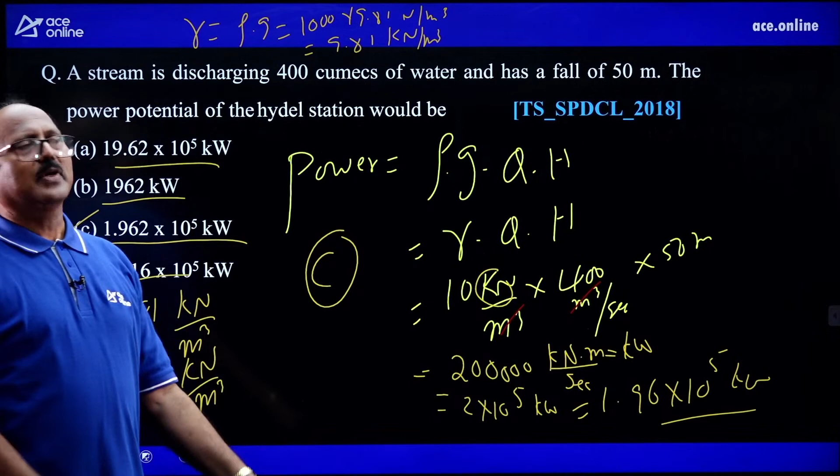Ratio of the power output of the pump to the power input is known as the efficiency of the pump. Power output of the pump is manometric head related, divided by power input, the shaft power. So power output is gamma QH, power input is shaft power, 2 pi NT by 60. Output of the pump divided by input of the pump gives overall efficiency.

Output is hydraulic power, input is mechanical power, 2πNT by 60. Input is 2πNT by 60, shaft power, electrical power or any engine power. Output is water power, rho G QH. Input is 2πNT by 60, shaft power.

So overall efficiency. Which of the following is not a dimensionless number? Friction factor F has no dimensions, something proportional to 1 by Reynolds number. Coefficient of velocity CV, actual velocity by theoretical velocity, has no dimension, no units.

Coefficient of discharge CD, actual discharge by theoretical discharge, has no units. Manning's coefficient we use for velocity of flow through pipe or open channel: 1 by n, root of hydraulic radius, root of bed slope. So this unit of the Manning constant n is equal to root meter by second.

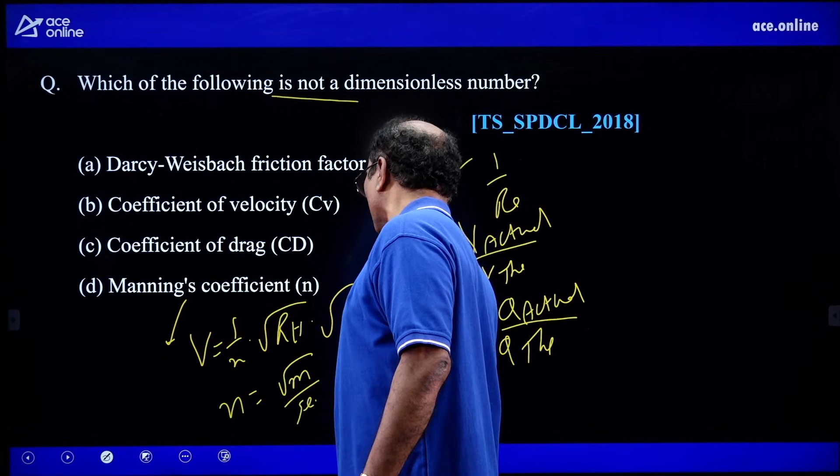So in open channel flow, Manning's coefficient has units, others have no units. By elimination method, being mechanical people you can know CD has no value, CV has no value, friction factor has no value of dimension. No value means no value of dimensions.

No mass, no length, no time - that's for CD, CV, and friction factor. But Manning's coefficient will have M to the power of 0, L to the power of 1 by 2, T to the power of minus 1, like that. So Manning's coefficient has dimensions.

So this completes all the questions of Telangana GENCO civil and mechanical - 100% questions completed except a few questions from open channel flow for the civil people. Open channel flow questions pending: hydraulic jump, critical flow, Froude number. There are 2-3 questions; you go through open channel flow yourself.

Okay, I have done the common portion for civil and mechanical. Keeping in mind the time, I have covered the questions - go through the next page. Specific energy, condition of maximum discharge in terms of minimum perimeter, hydraulic jump, like that - there are still 2-3 questions pending from open channel flow which I am keeping in reserve.

Now for review - what to review? Properties of fluids, common to both: dynamic viscosity, kinematic viscosity, surface tension, bulk modulus, like properties. Like the recent TSPSC AE questions from 20th October - good questions for practice, try to do that.